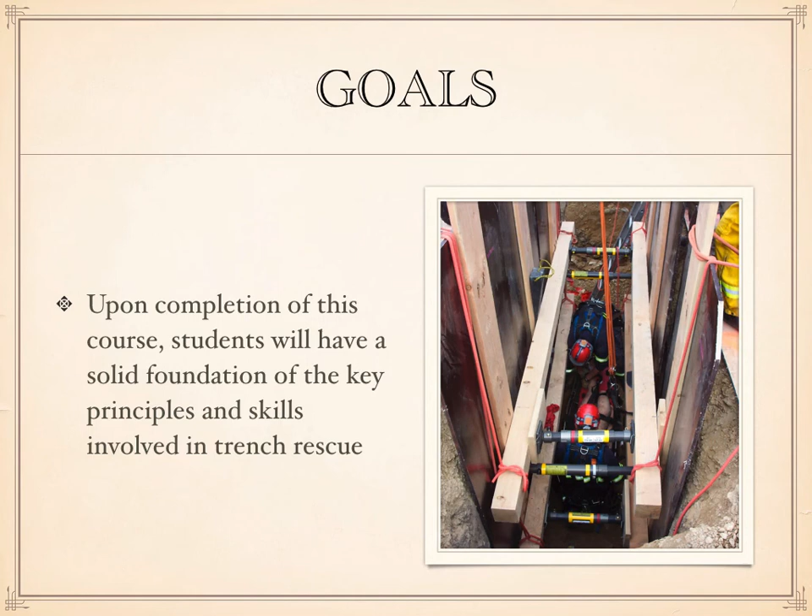Trench rescue is incredibly dynamic. The fundamentals are present on every trench collapse, yet each situation challenges you with different elements: large or small trenches, utilities involved, collapses occurring in different ways, different levels of injury, and soil principles that differ from place to place. Trench rescue is great in that way - the fundamental principles are the same for every trench, yet every trench is completely different.

Because normally when we complete the slideshow, we go out and do these skills, it's always prudent to mention safety. Anytime you're doing live trench training, it's very dangerous. There's always potential there - if it's a live trench, just because you're doing training doesn't eliminate that danger. It's very present. As instructors, we try to view the trench, look for danger signs, and make sure it appears as stable as possible before we feel confident training in it.

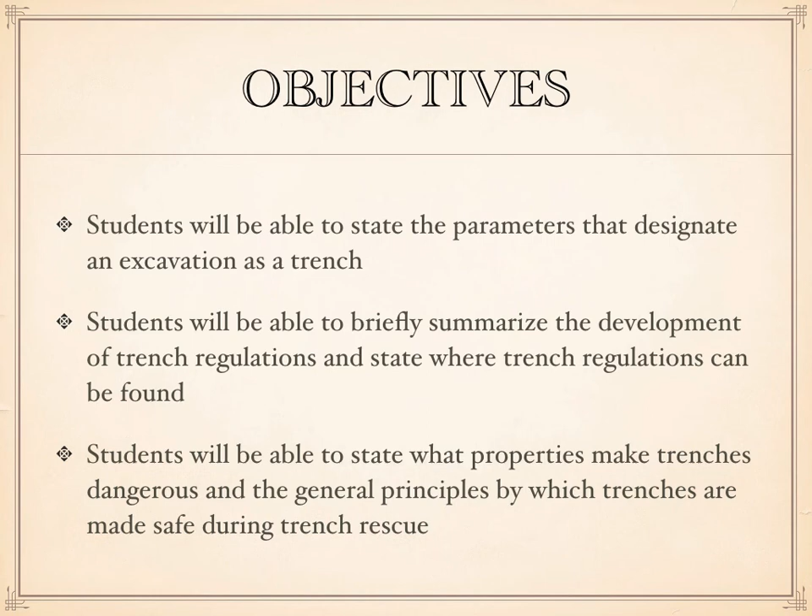Let's look at a few definitions. An excavation is any man-made cut, cavity, trench, or depression in the earthen surface formed by removing earth. A trench is always an excavation, however an excavation is not always a trench. So what is a trench then? A trench is any excavation in the ground that is deeper than it is wide, no wider than 15 feet at its bottom. When wider than 15 feet, we kind of go back to it just being a large-scale excavation.

Now, when we talk about trenches being deeper than they are wide, they need to be at least 5 feet deep to require that some form of trench protection be used. However, a 3 foot by 1 foot trench is still a trench - it just doesn't require trench protection.

So when we talk about trench regulation, when is protection required, really what we're talking about is OSHA. It's largely a construction industry mandate. Of course, if you go back far enough in history, you get to a point where OSHA wasn't around, and continue further back, you get to a point where we didn't have trenches.

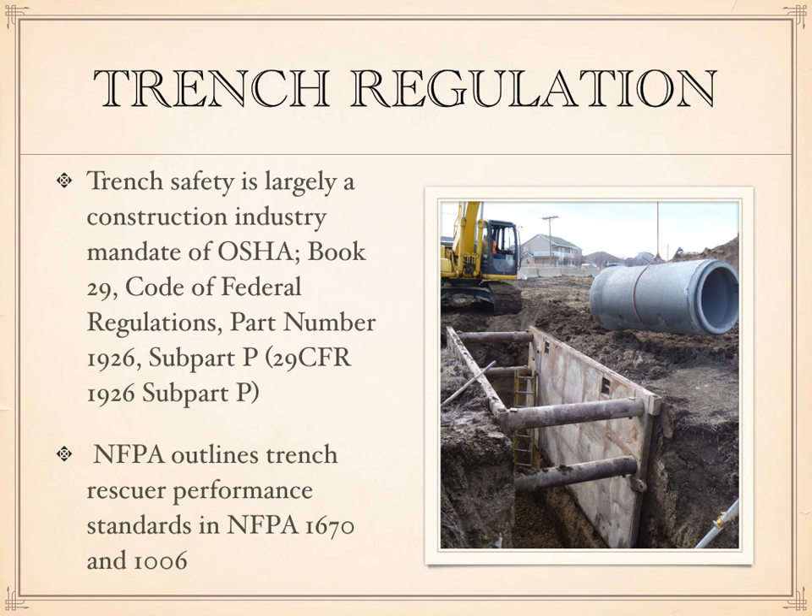Alright, so let's talk some basic soil principles. Uncut soil is very passive. Soil itself has a natural kinematic energy to it. When it's uncut and just there, not a lot of potential for movement. There is some, but not a lot. In this state, to relate it to paramedic type phrasing, you could say this soil has homeostasis. It's very passive, it's not going anywhere.

Of course, as soon as we excavate, as soon as we create a trench, we've taken that very passive, low-grade kinematic energy and made it very active. We've given it a high potential for energy. Gravity is acting on it, the environment is acting on it. There's vibration in the soil, hydrostatic pressures via rain or other things, environmental factors like wind. And given over time, the longer it's open, the freestanding time of the trench, the cohesiveness of the soil breaks down, and eventually it will collapse.

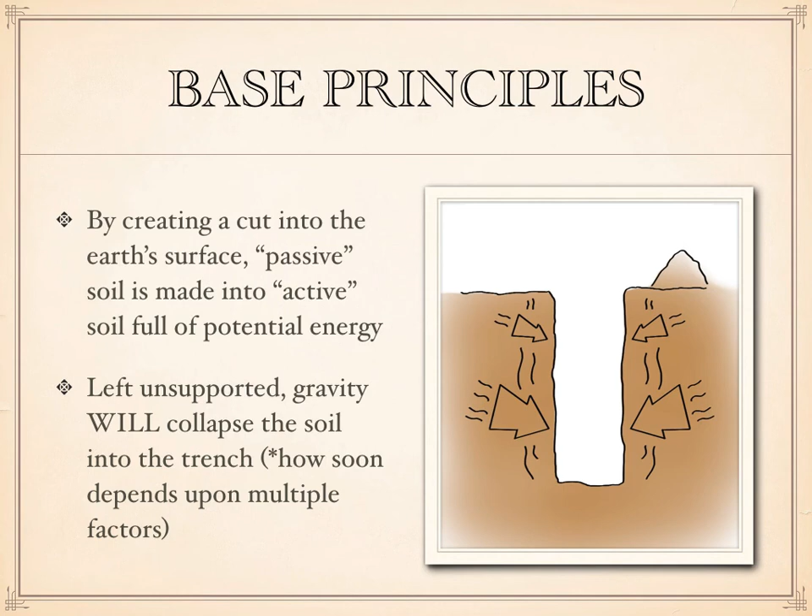Now, the danger of trench and excavation activity essentially comes from soil's weight in combination with its propensity to move. So when you think of the typical capacity of most backhoe loader front buckets being 1 cubic yard, if you've done any amount of landscaping work, you'll know that 1 cubic yard, a front bucket, is not a lot of soil. However, it is a lot of weight.

The accepted general weight of soil, just like a rule of thumb, would be 100 pounds per cubic foot. That simplifies the calculation and makes it nice and easy. However, it's a low estimate. According to the OSHA Technical Manual, soil's weight, depending on water content and rock content, is actually going to be closer to between 110 and 140 pounds per cubic foot.

So when you think of it that way, suddenly now you have a front bucket that weighs the weight of a mid-sized automobile, somewhere between 2,700 and 3,500 pounds. Consider that now coming in on top of you, if you were the one in the trench. Yeah, it's a very dangerous situation.

The OSHA Technical Manual states that 1 cubic meter, 35.3 cubic feet, is going to weigh possibly, again depending on rock content and water content, more than 3,500 pounds.

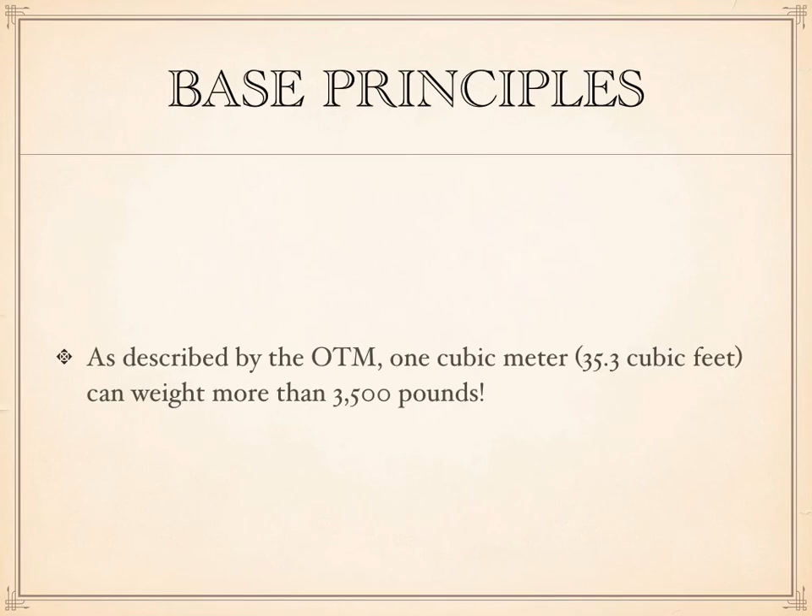A single trench collapse can very easily involve 3 to 6 cubic yards of soil. So we really are dealing with a very large amount of weight, a very large amount of potential energy here that creates that danger and hazard.

That's the reason why, if you show up on a trench, whether it's collapsed or not, if the trench is unprotected and somebody's down in there, maybe they're just unconscious, they've had a medical problem, a heart attack down there, if the trench is unprotected, you do not want to enter that trench.

Looking and considering those soil weights, you will not survive if you are fully buried. Unless perhaps you get lucky. There are circumstances that create situations where even fully buried persons or victims survive. There was a pipe between them and most of the collapse, or they were able to duck into a pipe, or the collapse happened in such a manner that they had a pocket where they were. So complete burial isn't necessarily the full end-all be-all, but you are dealing with a large amount of weight.

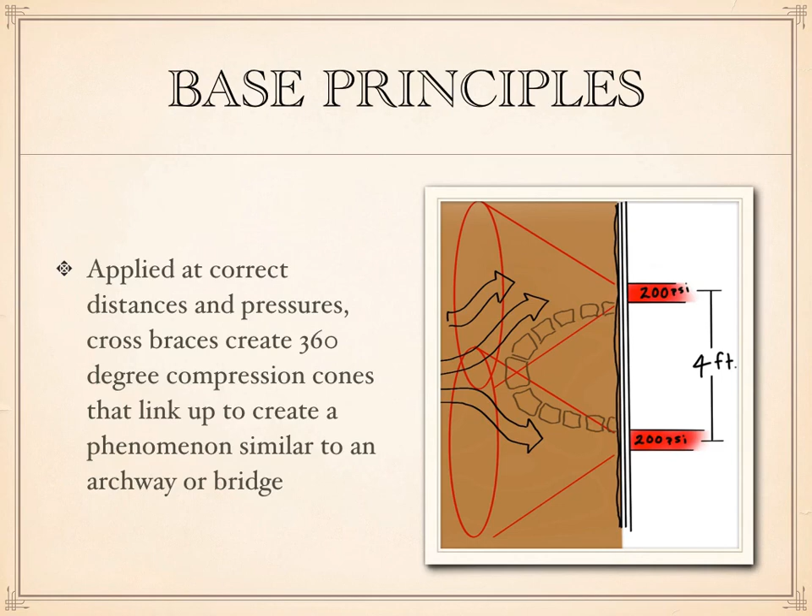Now, this arcing soil principle occurs both on a vertical plane as well as on the horizontal plane. So in some circumstances, like when we go and do trench rescue, we'll apply that rule of fours on a vertical and horizontal plane.

Now, in some instances you'll see in the construction industry, they'll use something like spaced shoring. They can do this in part due to the arcing soil principle. That arcing soil principle allows, with say a type A or type B soil, in some instances to not need the sheeting. You see in the diagram there, and we'll talk a little bit more about it later, but that's an example of open spaced shoring.

When we do this as a form of trench rescue, of course, we apply it as closed shoring. We'll create this arcing principle both vertically and horizontally, and we'll do it to create an area that's at least 12 feet wide when conditions allow.

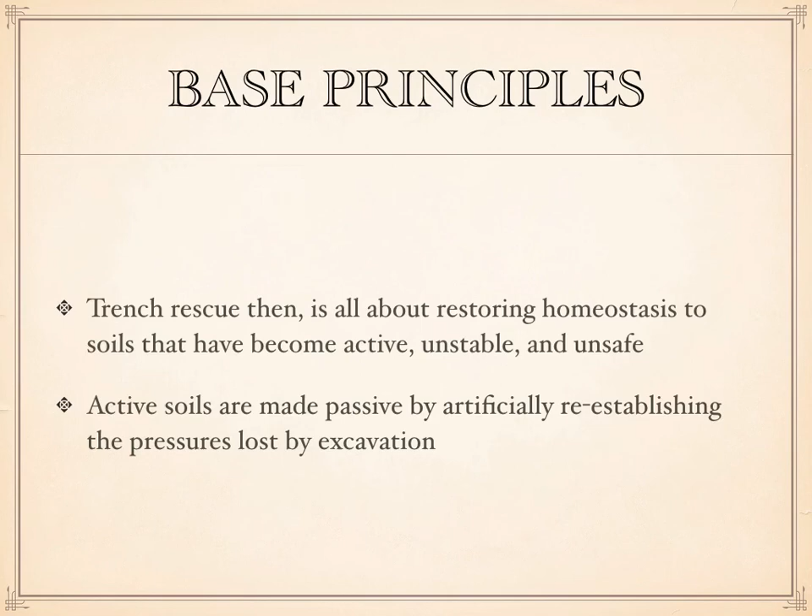Okay, so that's really the end of this module. Not too painful, short and simple, pretty basic, fundamental understanding, right? At this point, you should be able to state the parameters that define an excavation as a trench.

You should be able to answer what is the primary document where regulations on trench safety can be found, and at what depth are trench protective measures required.

Of course, you can read that final question there. Think about those soil weights, see if you can answer those questions. If you can't answer any of these questions, please go back and review. Then finally, can you generally state the principles by which rescuers render open trenches safe?

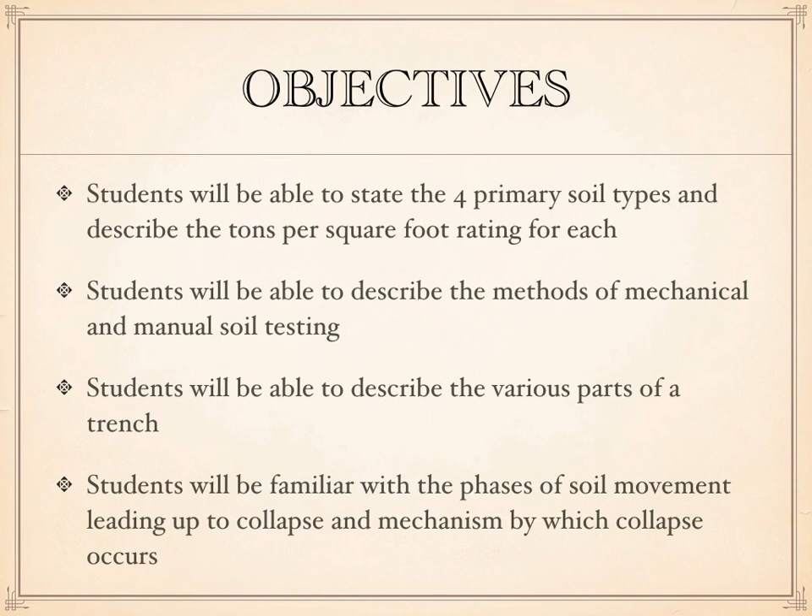Also, you'll be able to name and describe the types of collapse, describe the different protective methods used in the construction industry to make trenches safe, as well as be able to specifically state the component parts of a shoring system.

Alright, working right out of the OSHA Technical Manual here, you'll hear me refer to that as the OTM. The unconfirmed compressive strength of soil is the load per unit area at which soil will fail in compression. And that's kind of what they base their soil types on.

So we have soil - okay, so we have solid rock, which is pretty simple, pretty basic. For solid rock, they don't actually give it a tons per square footage rating for the unconfirmed compressive strength. So they don't give solid rock an unconfirmed compressive strength. For the remainder of the soil types, they do.

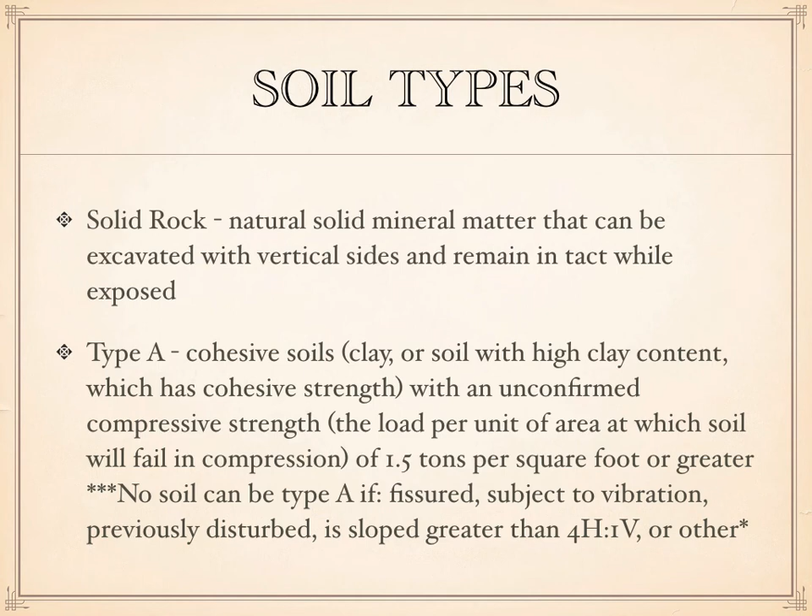Now, a type B soil is a cohesive soil also, but it has an unconfirmed compressive strength, or a UCS, of 0.5 tons per square foot up to 1.5 tons per square foot. So between that range, 0.5 to 1.5 for a type B soil. Type A, 1.5 or greater. Type B, 0.5 up to 1.5.

With the type C soil, you're going to have 0.5 or less. Now, any soil where it's submerged, if there's water freely leaking from the walls, or even submerged unstable rock, will automatically receive this classification. There is an additional soil type, a C60, but that's a topic for another slideshow, for anyone who's really excited about soil types.

Okay, so how do we get our soil rating when we arrive on scene? Well, we're likely not going to be classifying things in tons per square footage failure rating. However, there are manual soil tests that you can do.

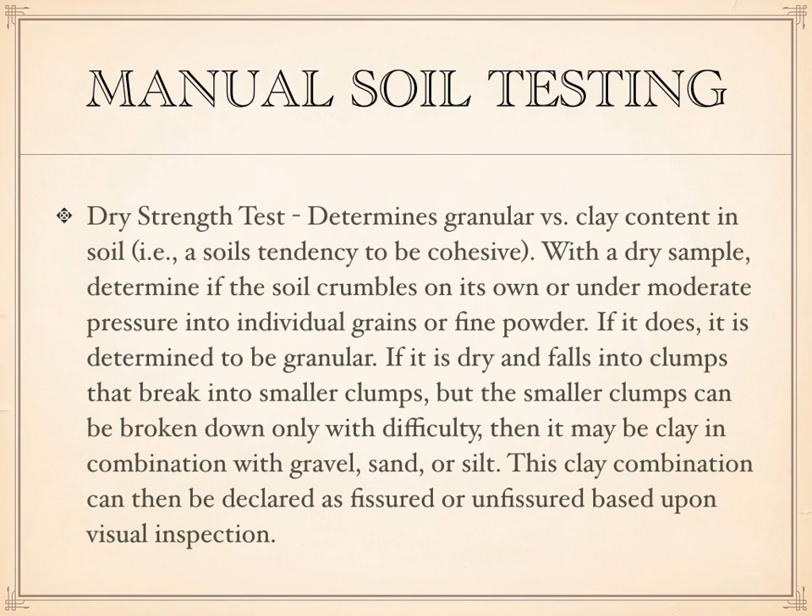There is another form of manual test called the ribbon test. It's done to determine how much clay or silt a soil contains. You're essentially going to take a saturated soil, begin to roll a 3/4 inch thick, 6-inch long cylinder, and lay it across your palm. Then you begin to squeeze and push some of that soil out over your thumb and forefinger until it's approximately 1/8 inch thick.

Now, as this is done, you allow it to hang over the side of the hand, and this piece that you're pushing over your hand is called a ribbon. The more of these ribbons you can get over the edge of your hand before it breaks and falls away, the more this tells us how much clay may be involved in the soil. If a cylinder forms 6 or more inches in length, then it is said to be clay. If it forms shorter broken ribbons, the soil contains silt, and a clay loam will barely form a ribbon of any length.

If you want to read the definitions of clay loam and all that good stuff, there's plenty of it available. Look in your OSHA technical manual and it'll give you all those definitions.

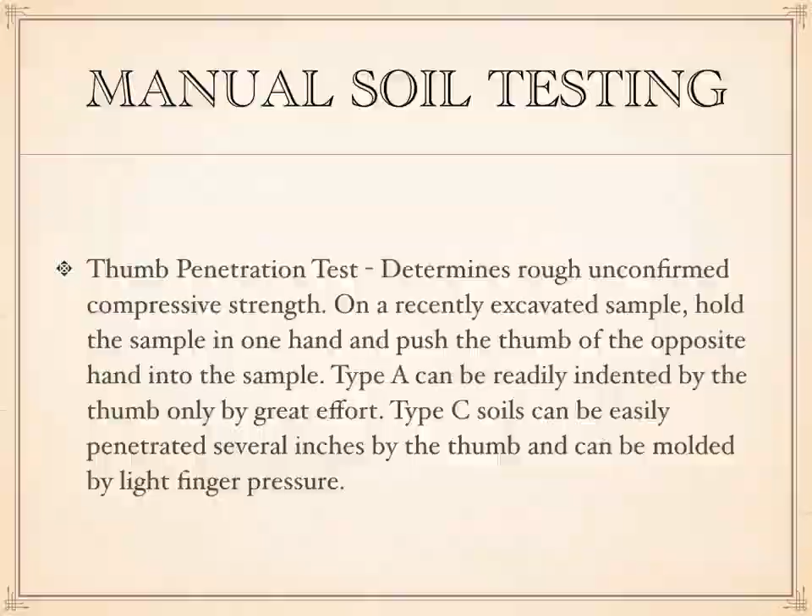I'll leave the comments for you guys. With the exception of some of those very first pictures you saw in the slideshow, all the pictures here in the slideshow were taken by myself, and the illustrations as well, as basic and simple as they are.

Now you can do mechanical soil testing. With a mechanical soil test, you'll actually get a nice reading that you can clearly say this soil is type such and such, or the unconfined compressive strength is this. Of course, again, it's that rating from the soil where you pushed the testing device in, so it's subjective. You might measure it in one location and get a reading, then go to the opposite end of the trench and get a completely different reading, or use a different sample.

So you have a pocket penetrometer, a little spring-operated device that when you push it into the soil, it has a spring, pushes in, and it'll ultimately give you a little reading. It's a fairly inexpensive tool.

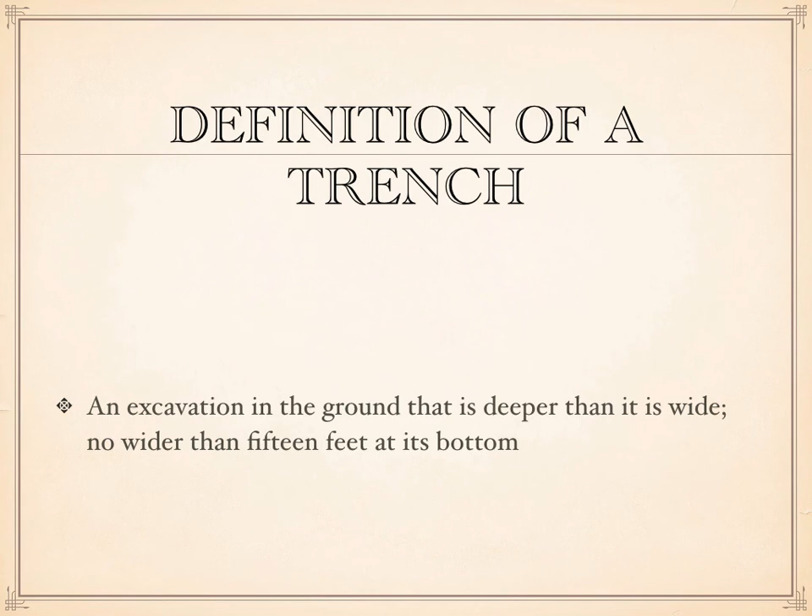Kind of a unique situation, just to be mindful of. If you have an excavation that's wider than 15 feet at its bottom, and yet there's some kind of form placed into the trench, whether it be a trench shielding system, or perhaps it was an excavation wider than 15 feet originally, but now they've built in a foundation and elements of construction. Anything put into that excavation that has decreased the width between it and the soil wall can still fit the description of a trench.

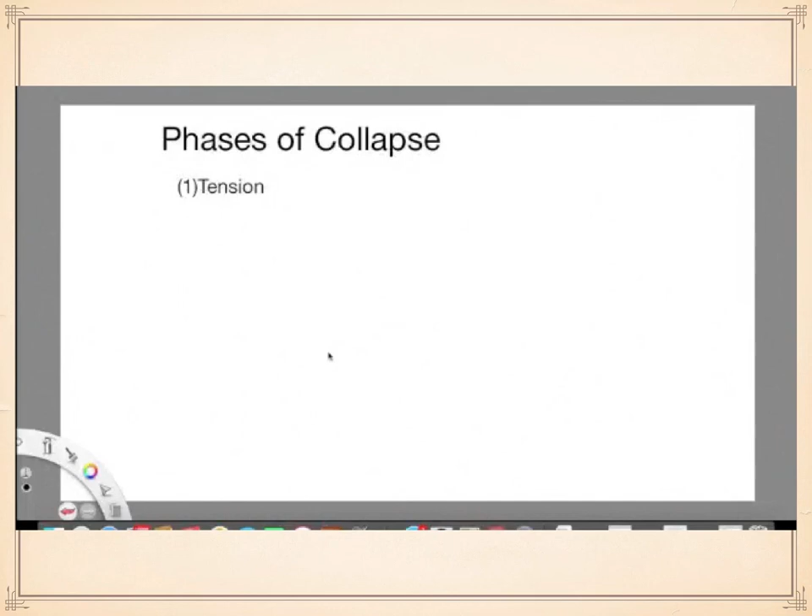Okay, this is your video on the phases of collapse, a little bit different than the actual forms of collapse. These are some of the things that happen leading up to a collapse occurring. So first, you're going to have tension. Anytime you open up soil, you create a change in that homeostasis, and it results in tension. Gravity's acting on the soil, trying to make changes. As the moisture level changes from drying out or rain, you're going to get tension that way, and you're going to weaken the cohesion.

Tension eventually results in cracks in the soil, either on the surface or below grade. According to the OSHA technical manual, tension cracks usually form at a horizontal distance of 0.5 to 0.75 times the depth of the trench, measured from the top of the vertical face of the trench. So here you're just watching me illustrate the effect of the tension cracking. The next phase, so that's tension, that's the first phase - the next phase is movement.

With movement, deformations in soil from increasingly imbalanced pressures start to actually change the soil physically to the point where it becomes visible. Now it's fairly minimal, most likely not going to be observed by your average construction person. Here, as I'm illustrating, I've made it a little bit easier to identify, obviously.

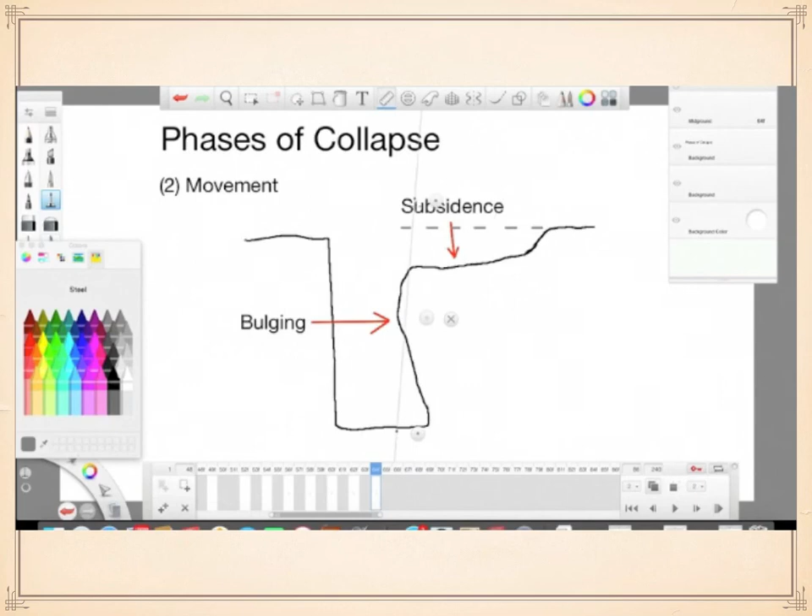One of the things that's going to happen is the soil surface is going to change level. That's called subsidence. This is when the soil fairly close to the trench opening will actually sink. Now that can occur with or without bulging. It can just compress and sink where you really don't have a bulge, but a lot of times you're also going to get bulging. Bulging is another form of movement that indicates collapse. It's one of those things you want to look for if you're teaching a trench class or working around a trench. You want to observe the trench walls for subsidence and bulging.

If there hasn't been a collapse, those are signs that a collapse is impending. There is another form of movement, and that movement is called bottom heaving.

In bottom heaving, pushing up of the soil at the trench floor results from all that significant pressure pushing down. The trench floor is weakened more so than the trench walls in this case, by moisture or by some other means. It might just be inherently weak at that level of depth, and it pushes up. Some experts classify this condition as a form of collapse known as compression collapse.

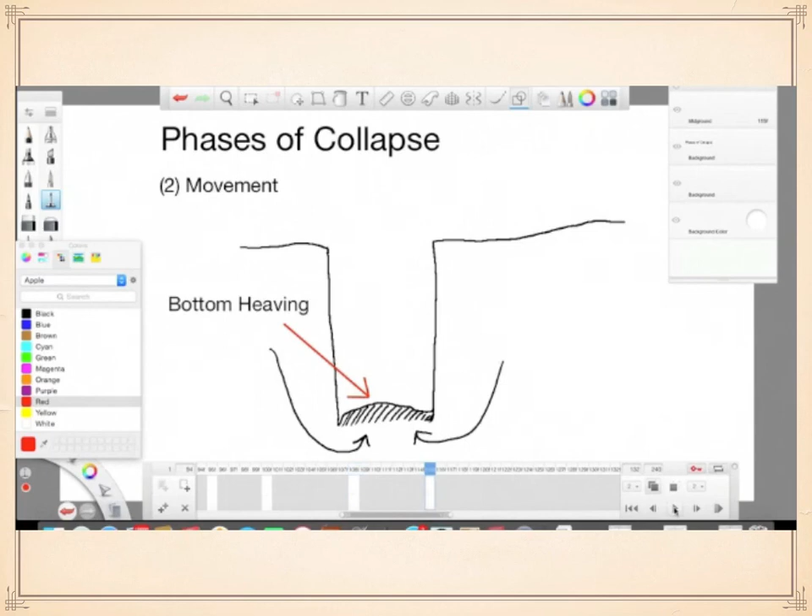Another form of movement is boiling. Here we're still watching the bottom heaving. Figured the illustration would be a little bit better than just a dry slideshow. So another form of movement is boiling.

Boiling happens when the trench has been cut, for the most part, into a water table, and maybe there wasn't water in there initially, but over time the water seeps in, begins to push up the trench floor, as well as create a saturated condition down there. Of course, when that happens, you're weakening the support of the trench walls, and it's an impending warning sign of collapse.

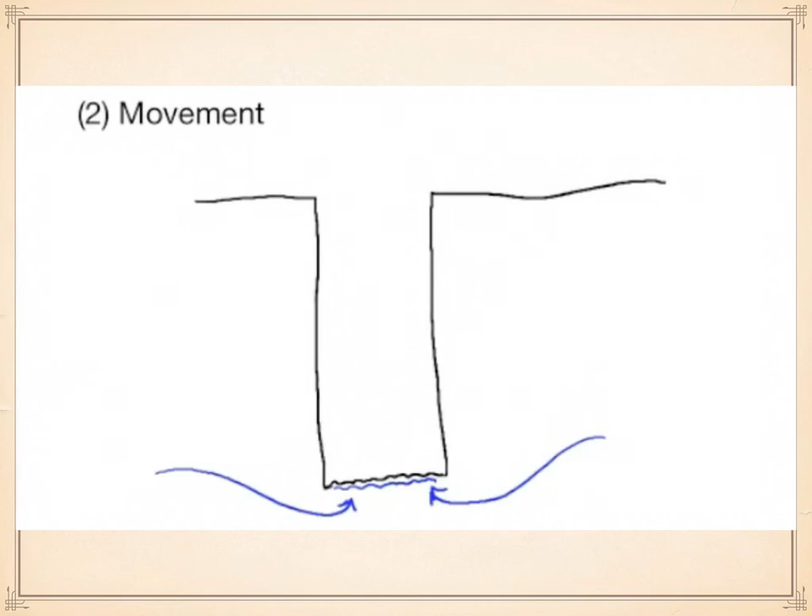Now the third phase leading up to collapse is actually collapse. So this is more the means of collapse than a phase leading up to it. But you basically have two means by which collapse is going to occur. Either the collapse will occur gradually or it's going to occur catastrophically. It's either going to occur because of toppling. Toppling occurs when the trench's vertical face shears along the tension crack line and topples into the excavation.

More accurately, toppling is a forward rotation out of the slope of a mass of soil and rock, also about a point of axis. So here I've put the red dot into my illustration here, kind of showing how the collapse - it could be that point could be anywhere in the trench wall. It could be at the very base where the floor meets the toe.

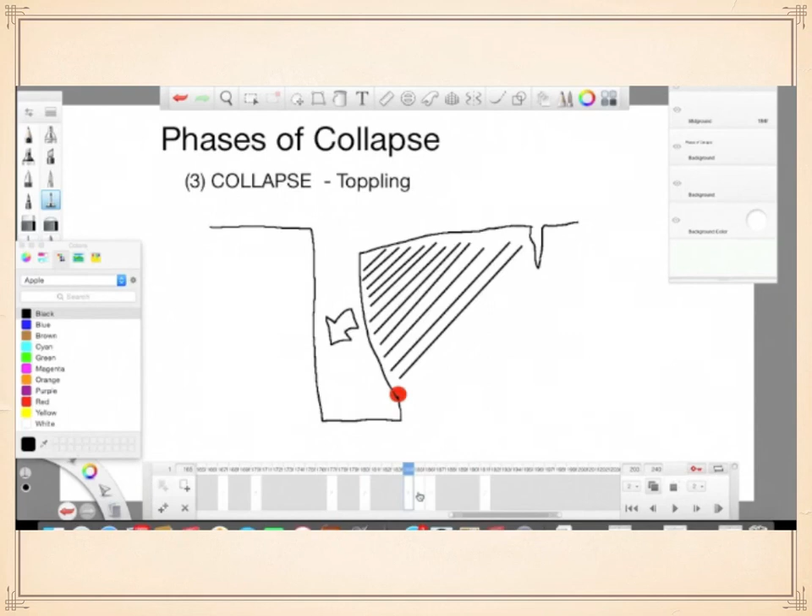Typically, the belly of the trench is the weaker area of the trench. So here I threw that dot there just to kind of show you. The toe is staying strong, but it's pivoting from that weak point in the wall, and it all kind of moves on that. It kind of acts as a point of axis for the collapse. You can see how gravity just takes it.

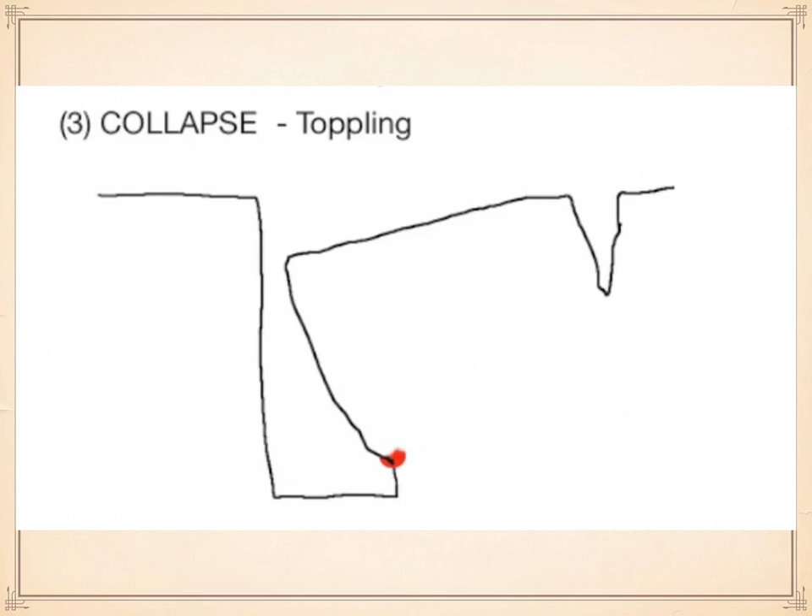Another form is called sliding or sloughing. That's commonly used here. It can be a little bit confusing because there is a type of collapse with the same name. However, as a means of collapse, this is just where it's a downsloping movement of the soil. The cohesion is weakened, different from a pivot point or an axis point where it kind of topples in.

You can kind of think of this as like when you have a spoil pile, the soil will try to attain that nice desired angular slope, that angle of repose. Here the soil, as cohesion breaks down, the soil is sliding down into the trench. Again, it can be catastrophic, or it can occur gradually.

Factors that contribute to soil collapse include soil activity, vibration, hydrostatic pressure, environmental factors, and the amount of freestanding time. All those things are going to play a part. Soil activity includes the soil's kinematic propensity for movement - it wants to go, gravity's working on it. Time is all it needs. Eventually, at some point, any open trench is going to collapse if left continually subject to environmental factors, gravity, hydrostatic pressures.

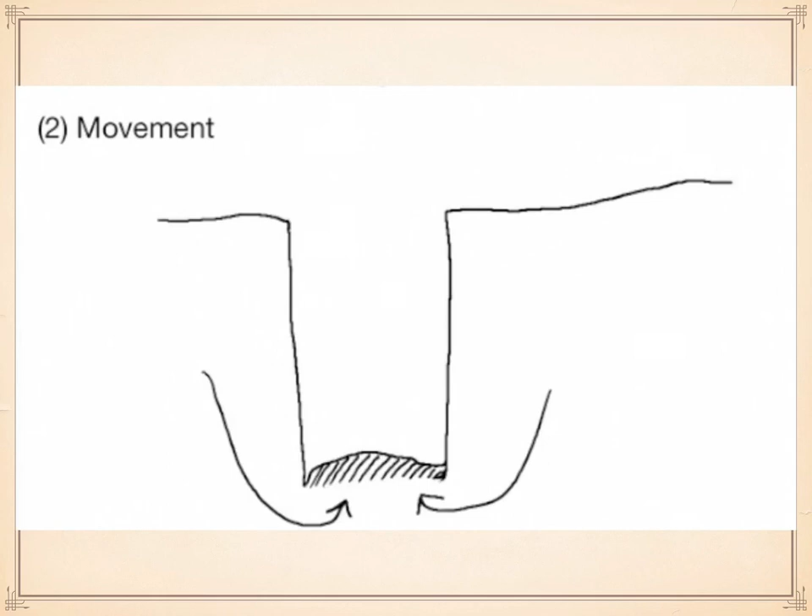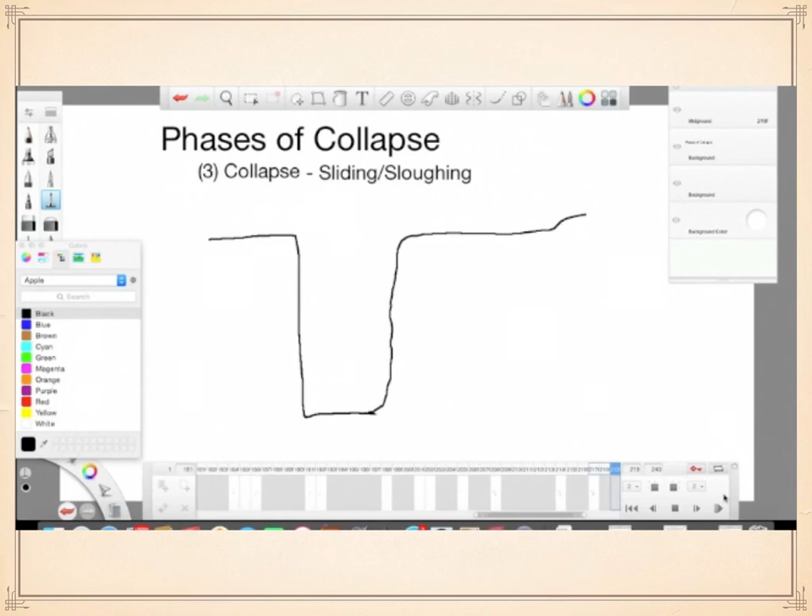You have your tension cracking, your first forms of movement, subsidence and bulging, that bottom heaving, boiling, of course your toppling, pivoting on that axis, and then again you have your sliding and sloughing.

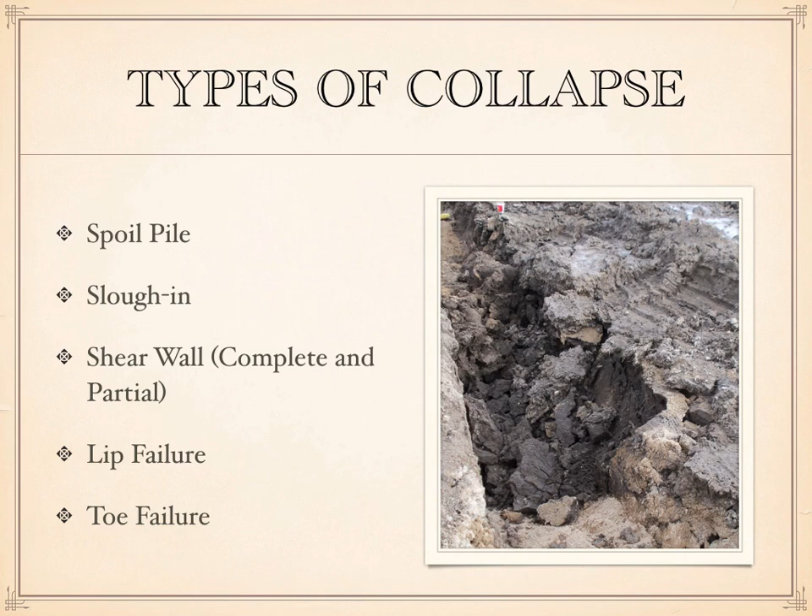OSHA requires a 2-foot setback for spoil piles. Spoil piles are an encumbrance. They add soil weight, they contribute to that surcharge loading. And just by virtue of being next to the trench, they can be enough to contribute and cause a collapse to occur.

At the same time, they're sitting there. They have a natural angle at which the soil wants to settle, that maximum allowable slope or angle of repose, and perhaps some vibration occurs, or just gravity gets it over time. The spoil pile itself can slough off and fall into the trench. So there are two ways spoil pile collapse can occur: either by contributing to a collapse through surcharge loading, or the spoil pile itself falling into the trench. That's what we're looking at here.

It's a 2-foot setback that OSHA requires. Most companies will strive for a 4-foot setback. Doesn't always occur.

Whoever's excavating, if they're in a hurry, it's quicker to, as soon as you pull that bucket out, drop that soil right there, and it tends to slide back in. Soil tends to want to assume its angle of repose immediately, so it tends to settle in. By virtue of that, whoever's excavating may realize they need to move that spoil pile away because it's falling back in. But there are occasions where you'll find spoil piles too close.

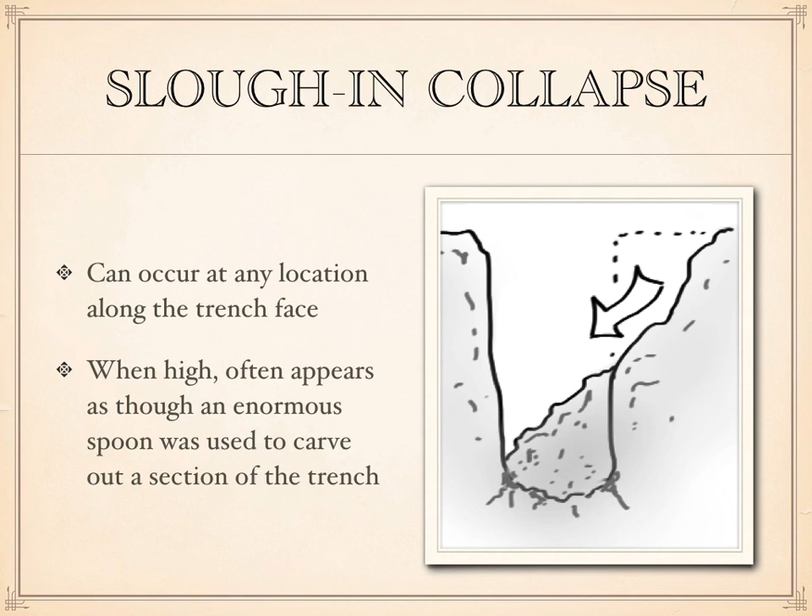So it can occur like you see in the picture here, where it occurred up high, and you've lost that entire portion of the belly and the lip. A slough-in can also occur, and this is a particular note to rescuers, in a manner where the belly gives way, it sloughs into the trench, and it leaves an overhang. Usually occurs where the soil was affected by hydrostatic pressure. There's been a lot of rain, the top sides absorb the water, it's soaked down and weakened the belly.

When you're approaching a trench, we'll get into it a little bit later, but this form of collapse, where it sloughs in and leaves an overhang, this is where a rescuer can, if he approaches the center of the trench as opposed to approaching from the ends, find himself in a sticky spot. Now, the slough-in from mid-belly leaving an overhang isn't a type in and of itself, it's just a slough-in collapse. This just occurs in a way that it's worth mentioning on its own, due to the danger to rescuers.

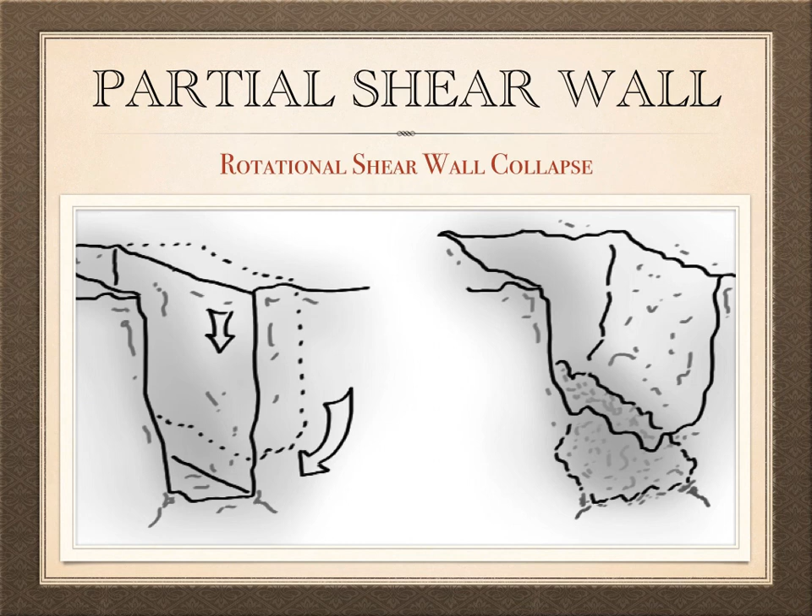Now, there's also partial shear wall collapses. This is commonly referred to as a rotational shear wall collapse, probably the most common form of collapse. You still have that vertical plane effect, but at some point it held strong, like in this picture where you see the toe held strong there. Otherwise, the collapse occurs on a very vertical plane through that sliding mechanism, so it releases and then collapses into the trench.

Another form of partial shear wall collapse would be the wedge or triangle collapse. Obviously, when we have corners in a trench, whether it's T or L shaped, those are inherently weak areas. You have open trench faces that come together and meet, they both lack support, and gravity is doing its thing.

There's also lip and toe failure. Less common forms.

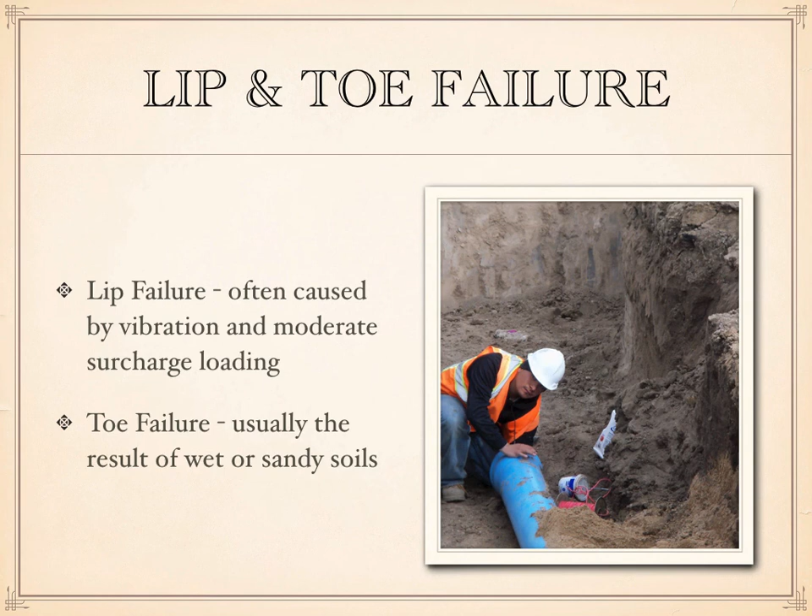Again, there's a slideshow on it that I made and illustrated and put just on the YouTube channel by itself, so you can watch that again if you're so inclined. You can't really go out and film these types of collapses occurring, and this is just a great way to review as you're needing to do so over time, and you kind of start to forget these type of things. Good to go back and review.

All right, Jason Hankins here with another trench video for you. Just informational, this is really basic kind of trench 101 type of stuff. Certainly informational - what you name the type of collapse once you've arrived on scene doesn't really matter, but these are some of the terms you might hear if you're talking to a heavy rescue guru about trench collapse type stuff.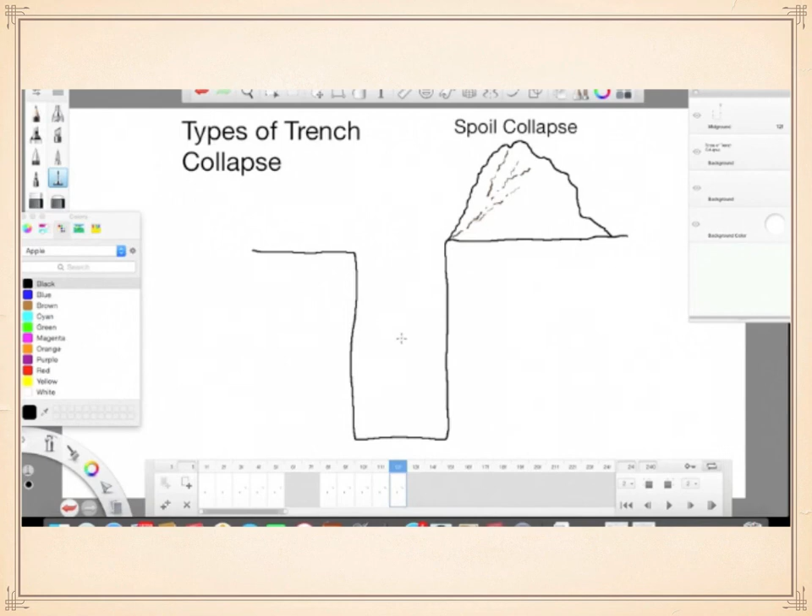One of the most basic types of collapse would be a spoil pile type collapse. Remember, OSHA requires a 2-foot offset, that doesn't always occur. Soil has a natural angle of repose, otherwise known as a maximum allowable slope, and that's the slope where gravity will naturally make that soil settle. If you pile soil at an angle steeper than that, or cut soil at an angle steeper than that, you're going to have a tendency for that soil to want to give in to gravity and fall into the trench.

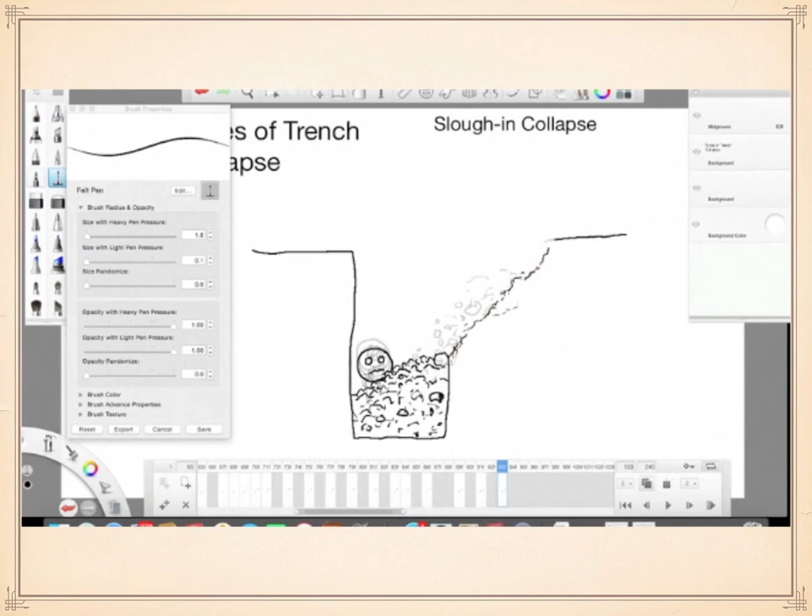Slough-in can often be due to surcharge loading - that's heavy items in the area of the trench or very near to the trench opening. Remember, we park our vehicles out of the hot zone, greater than 50 feet away.

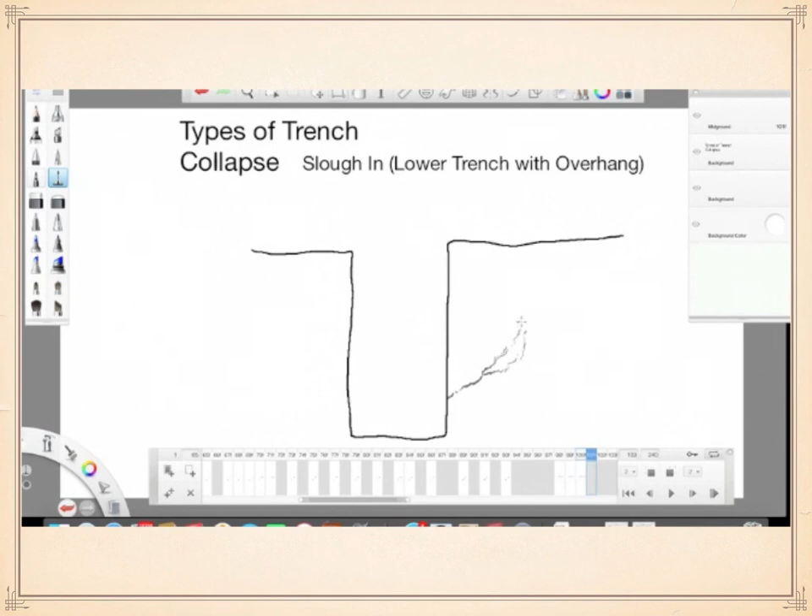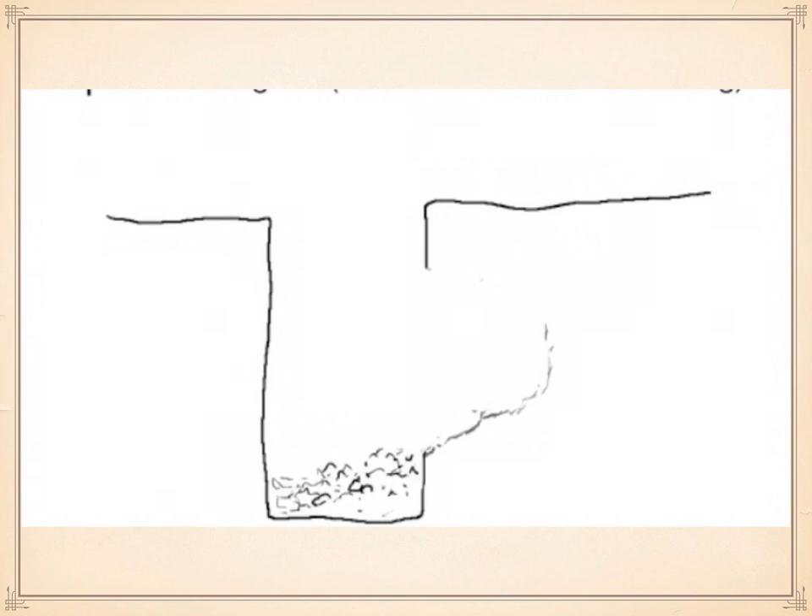Did a little graphic here of just a slough-in occurring in a mid-belly type of slough-in. It's not really a type per se on its own, it's still a slough-in collapse. However, this warrants particular attention because it leaves an overhang, particularly dangerous for rescuers, anybody coming into the area where this has occurred. Potential to stand right at an overhang. That's why when we're approaching a trench initially, we approach from the trench ends versus approaching from the side - we don't want to get caught by an overhang. Overhangs are less likely at the trench ends.

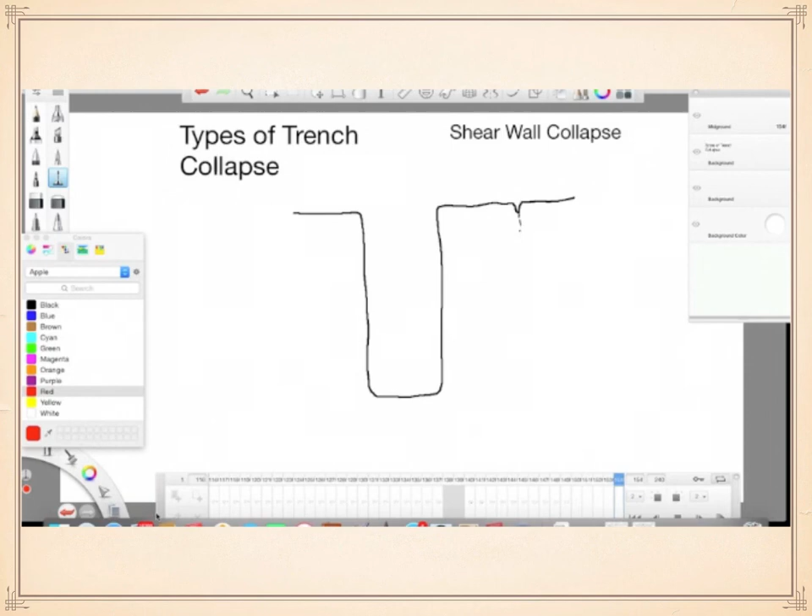So the next type of collapse that you're going to see is going to be a shear wall collapse, also known as a sidewall collapse. Very catastrophic, usually occurs fairly quickly, can occur slowly. Usually occurs on a nice vertical plane - all the shear wall collapses will occur on a very sheer wall plane. A lot of times in areas where there's been previous excavation.

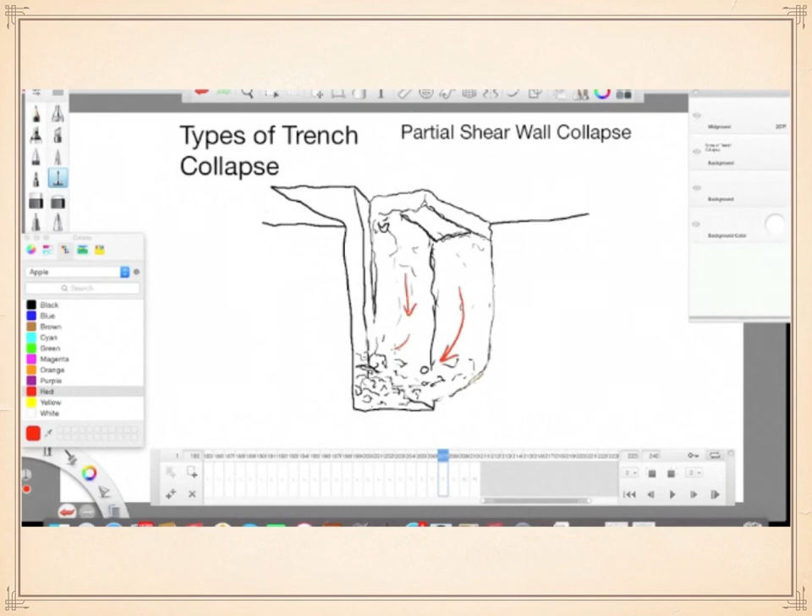Here you're seeing a form of partial shear wall collapse called a rotational collapse. The rotational collapse involves a kind of a slough in a very downward manner. So it gives way low, and then gravity takes it and pushes it down and on a curve into the trench. This is where you'll often end up with a victim slammed hard against the trench wall and pinned.

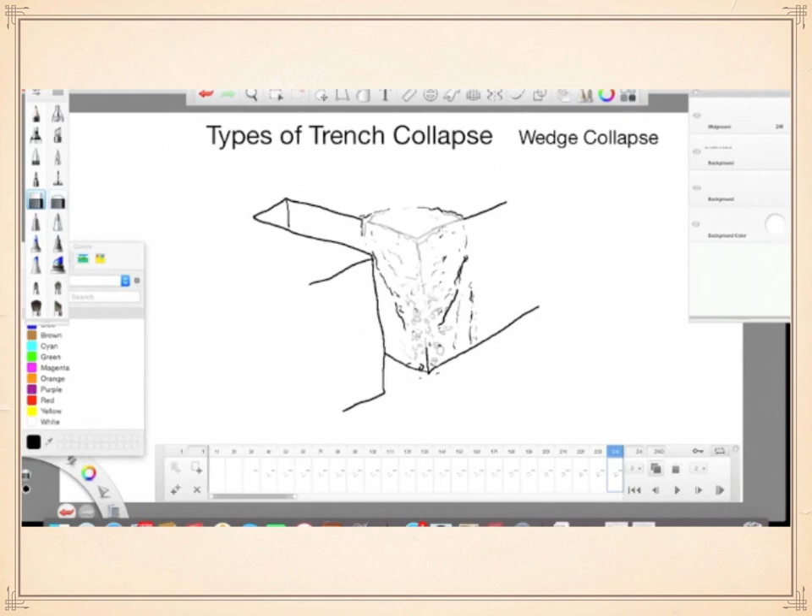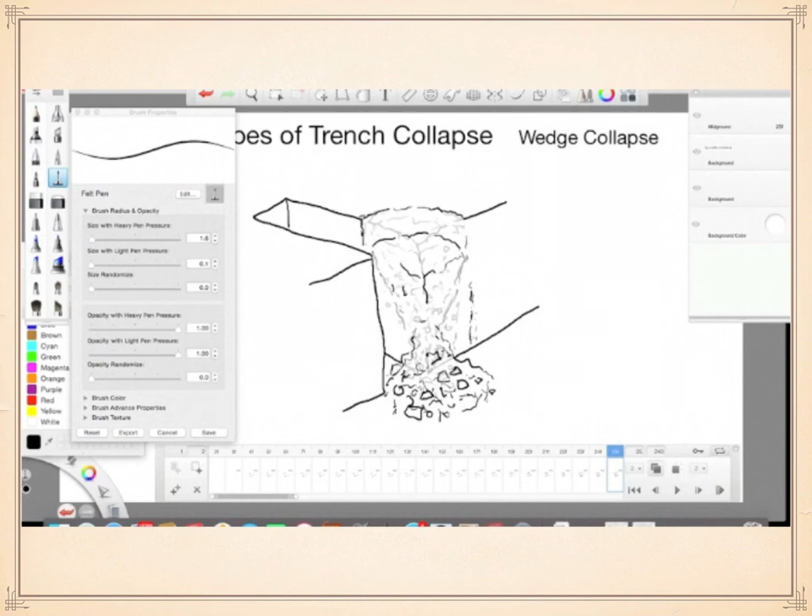T's and L's are very difficult to deal with, somewhat problematic for rescuers depending on the level of the wedge. It's a subset, more or less, of the partial shear wall collapse. Here I've shown it kind of partially up the wall, but it can occur, of course, full length from the toe to the lip.

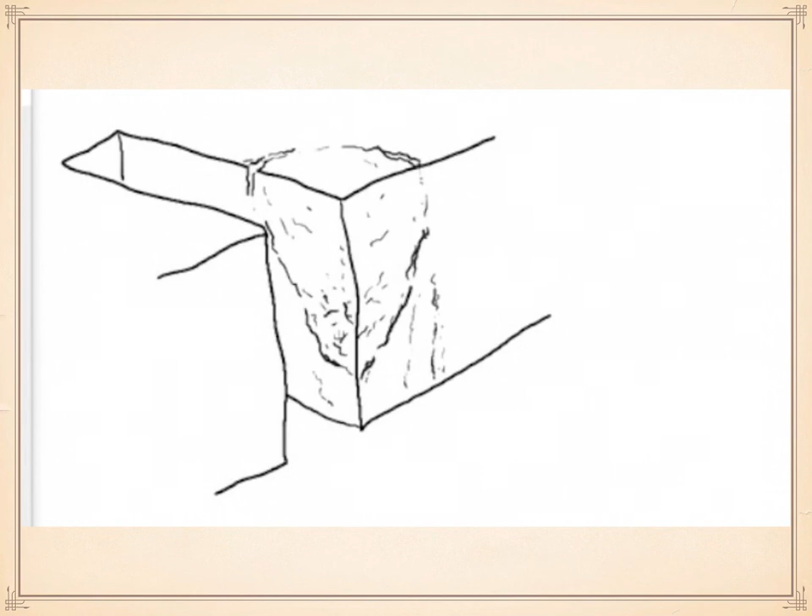The next two forms of collapse that you're going to see are a lip failure and a toe failure. A little bit less common. Lip failure usually occurs when you have a nice, very cohesive soil, nice and stable, but something in particular at the top—here I've drawn a little guy with a jackhammer—but whatever it is, whether it's surcharge loading, vibration, maybe it's weather, something causes just a weakening in the very upper portion of the trench, and you'll have a lip failure. Not usually too problematic unless someone was down inside the trench at the time the lip failure occurred.

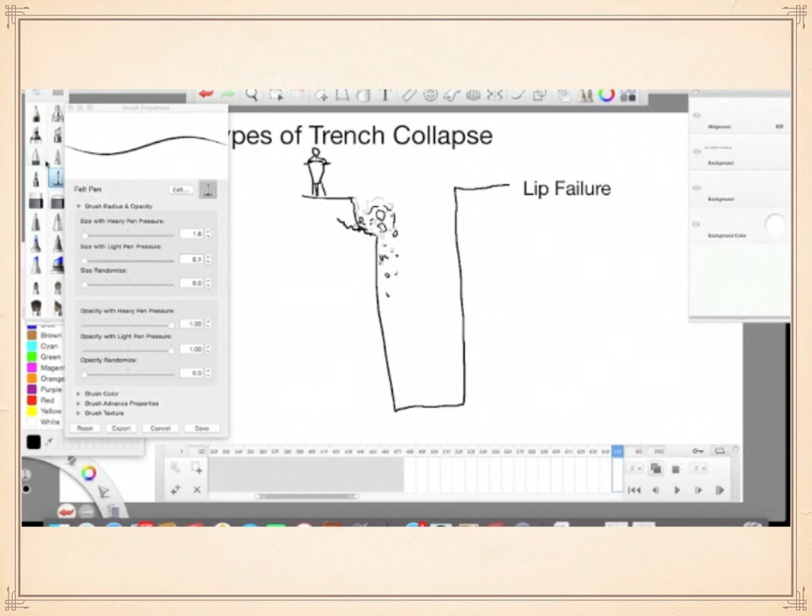The falling soil, falling objects from the top—if something's laying directly on that lip, it can fall down into the trench and injure someone quite severely.

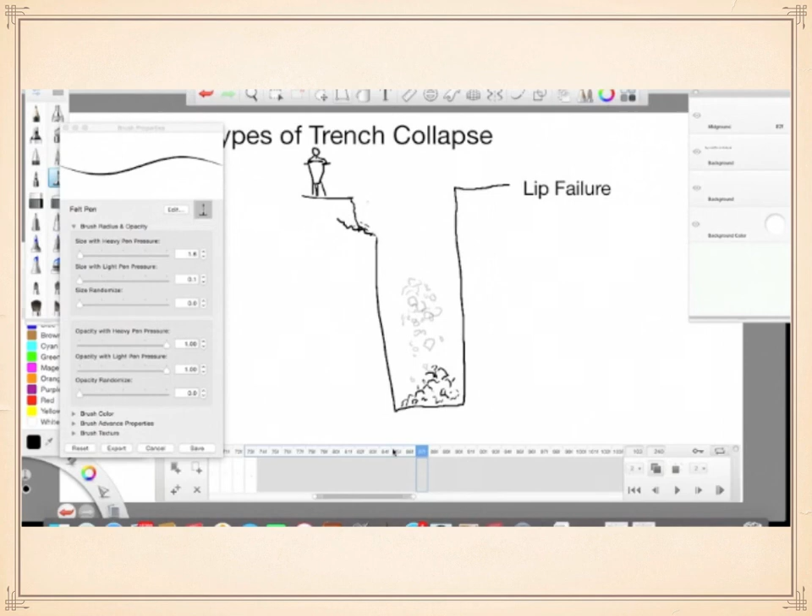All right, so the next form is toe failure—failure just at the toe. Again, that form of collapse is going to occur in very specific conditions. The soil is very cohesive, things are holding together well, but something in particular causes a weakening in the toe—perhaps a high water table, large amounts of rain, water used during a construction process, maybe combined with a little bit of vibration. But something is weakening the soil at the very base of the trench, where normally you have some support and some strength in the trench wall. In this case, weakening it to the point that the toe fails.

Of course, at that point you have to worry about the next form of collapse that's coming.

A condition that's kind of a toe failure, a subset of toe failure, worth mentioning is the bell-bottom pier condition. That's where the soil kind of sloughs in at the very bottom on both sides, or in the circumstance of like a pier hole being drilled into the soil—someone's going to pour big concrete piers, they create just a circular hole in the earth. Again, add in a high water table or significant rains, and if that bottom gives way in a circular manner, or in the case of the trench on both sides, then you have what's called a bell-bottom pier condition. Really leaves no safe place to stand or operate near the trench edge.

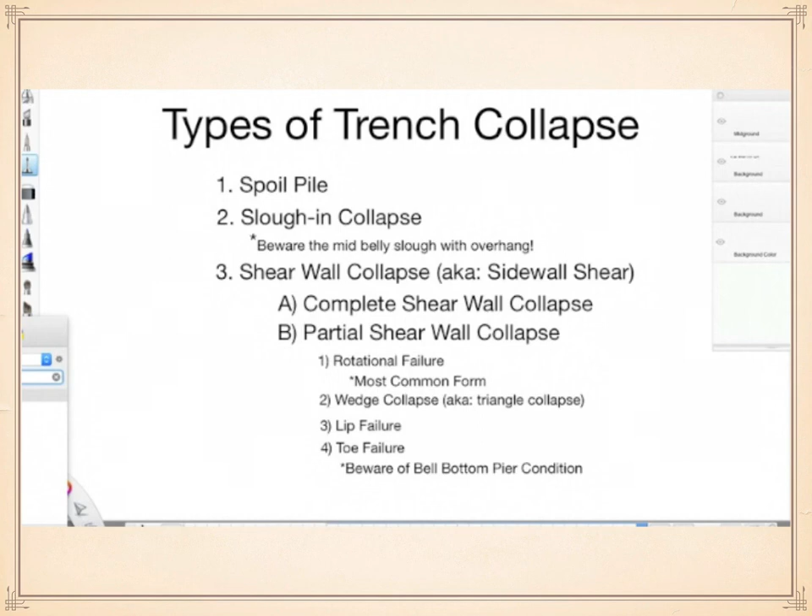All right, so just a little bit of review. Spoil pile collapse, slough in—beware of that mid-belly sloughing with the overhang. Shear wall collapse, also known as sidewall, with your complete and partials—rotational failure being the most common, wedge collapse, lip failure, toe failure. Just be aware of bell-bottom pier conditions. Don't see that a lot, but very dangerous.

Spoil pile. Final review here, kind of. Slough in with overhang. Complete shear wall collapse, partial shear wall collapses—subset rotational failure, most common form. Subset wedge collapse, common to T's and L's, of course. Lip failure. Toe failure. And of course, bell-bottom pier.

All right, one more time just to beat this thing to death.

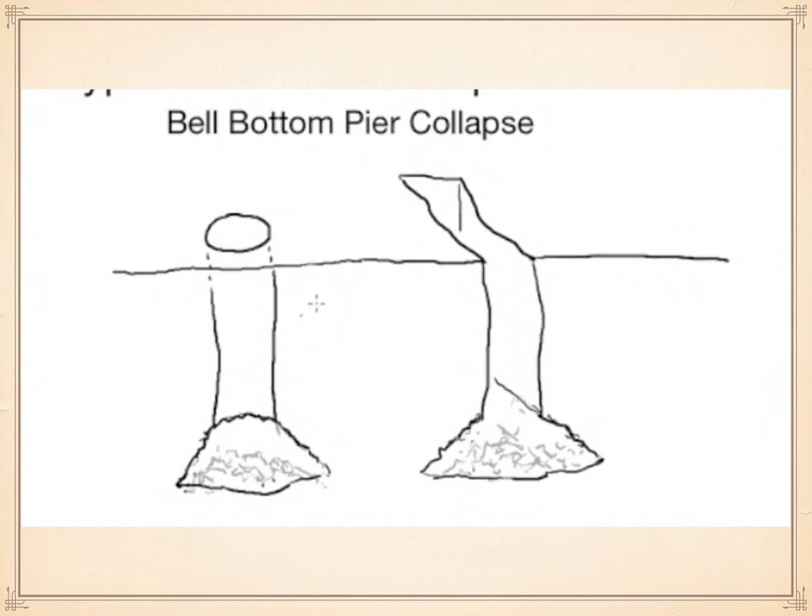All right, moving on to protective systems. Protective systems are something you could encounter. We're going to build our own protective system when we arrive on scene, but you'll also find them already on scene when you arrive to a trench collapse. Potentially not, that might be why you're there. As you drive around looking at construction, road construction and otherwise, you'll see the various protective systems in use.

So the first protective system worth mentioning is sloping. Of course, that's cutting into the soil at a nice angle so that you don't deal with that angle of repose, and you reduce the risk of collapse simply by cutting the soil itself at an angle where there's somewhat of a passive energy.

The angle of incline required to prevent the cave-in is going to vary with the soil conditions, the environmental conditions, and the level of encumbrances expected during that operation. So that's a construction industry type thing, of course.

Benching also is a construction industry method, where they're going to cut essentially what looks like steps into the side of the soil. And how many steps and how tall they can be is all determined by the soil type, the weights they expect in the area, the encumbrances, and surcharge loading.

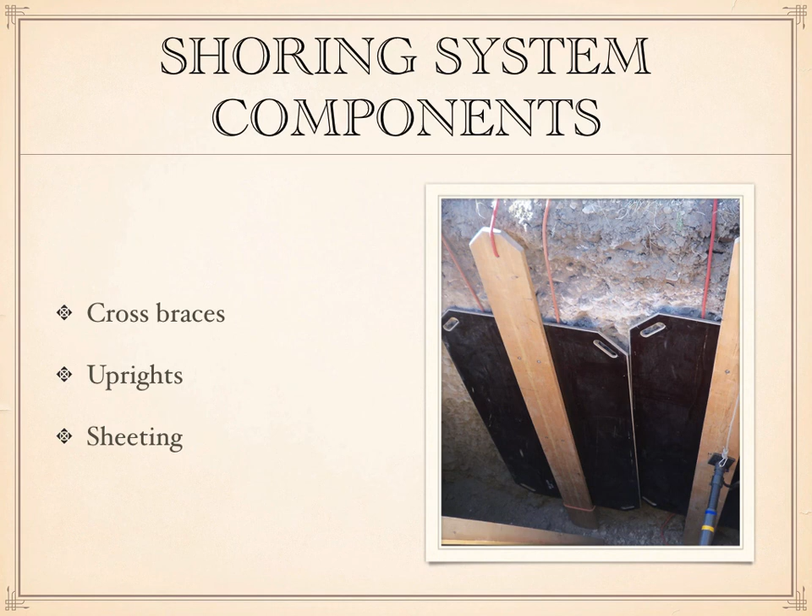Additionally, when you're talking about shoring systems, you'll hear in the construction industry of spaced shoring. Spaced shoring is an option that can be done in like a type A soil. It's very stable, but they do want to provide some stability to it. What you'll see when you see spaced shoring is you'll see a cross brace with an upright, and the upright itself is placed against the soil. And the next element to the shoring system will be several feet over, leaving some exposed trench wall. This can be done in stable soils like type A soils.

What we're going to be building when we're building shoring systems is closed shoring systems, where the sheeting of the system allows no gaps, no exposed soil wall. It's sheeting to sheeting to sheeting, all the way across.

There also is different types of shoring. You can have your aluminum hydraulic shoring, your pneumatic shoring, and your screw jack shoring. Of course, those are all terms referring mainly to the cross bracing.

With timber shoring, you're going to end up using tabulated data from OSHA to determine exactly how big of timbers do you need, 4x4 or 6x6, and what are the true expected weights of the soil at what level. So if you're going to be doing a lot of timber shoring, you need to plan on being very familiar with that document and being very, very good at performing a timber shoring operation.

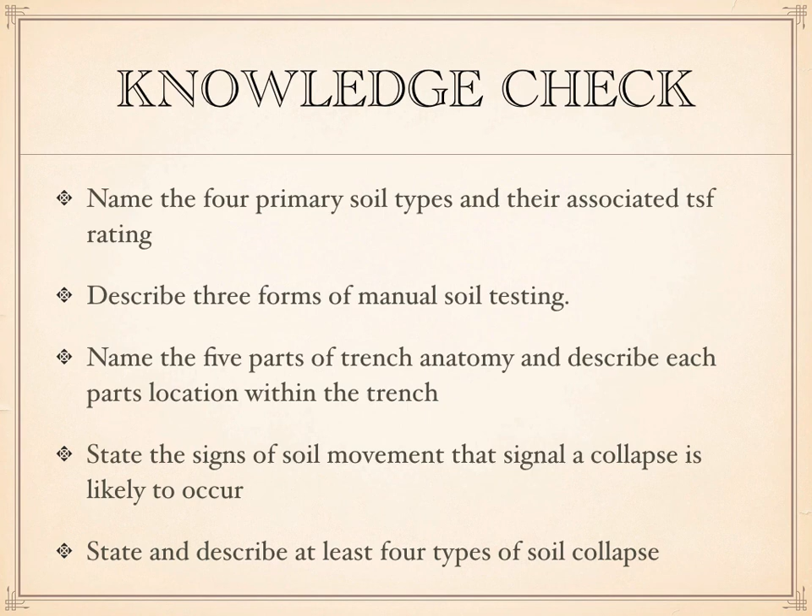A few more questions here. All right, see if you can answer those questions. Pause the video and we'll come back and we'll begin Module 3.

Okay, I assume you all had a break and feeling a bit refreshed, you've got your coffee refilled. Let's get into Module 3. I'll try to talk just a little bit more openly, a little bit more casually as we go through this. This really gets into just the trench emergency response, and we'll try to go through it semi-quickly. This is the point in the slideshow where really we kind of hit the fundamentals and then get you out to the soil and start practicing these techniques and really start to teach you more and give you more information. But this module will give you a basic understanding of what you're going out to do exactly when you go out to a trench.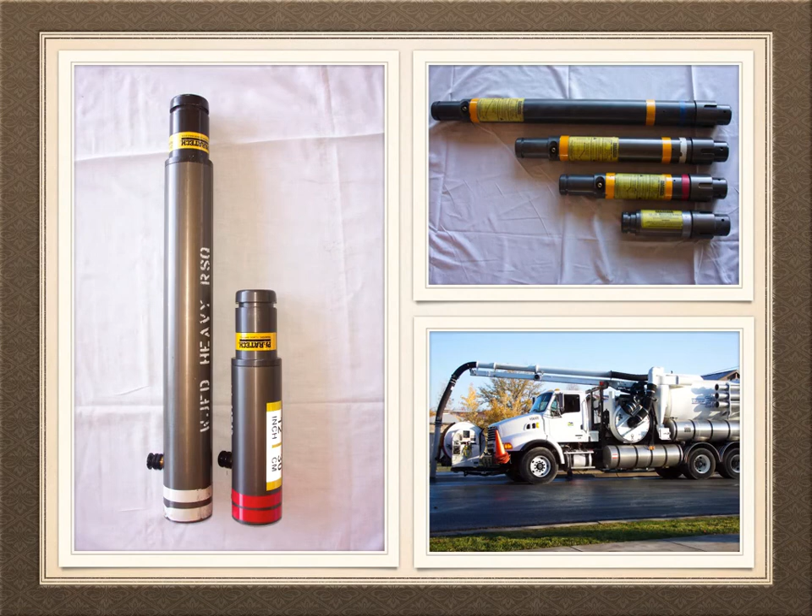In West Jordan, we use Paratech struts, so we've got them taped according to length: blue struts, white struts, red, and silver. Extensions get a double taping, so a double white or a double red. I believe our marking system is consistent with UFA's and most of the valley departments.

Through that picture in the bottom right of the vacuum truck—pre-incident preparation doesn't only include training with your own department, it should include training with other departments, including your local utilities department who may be running a vacuum truck. That's something you have to train on beforehand, before the incident occurs. If you wait till later or during the incident, you're going to have a hard time.

Here's another element of pre-incident preparation: trying to make anything done on scene of an actual collapse that much smoother, taking out the element of having to think things through as much as possible.

It sounds kind of funny, but in the context of struts, we've made a sheet that the strut team themselves can reference. The RO can call out a measurement—say I have a trench that measures 38 inches. RO calls out 38 to the strut team, and they can refer to this sheet and immediately, without doing any calculations, look down and see, okay, I can make 38 inches with a white strut and a red extension. It simplifies the thought process and makes it quicker and more efficient.

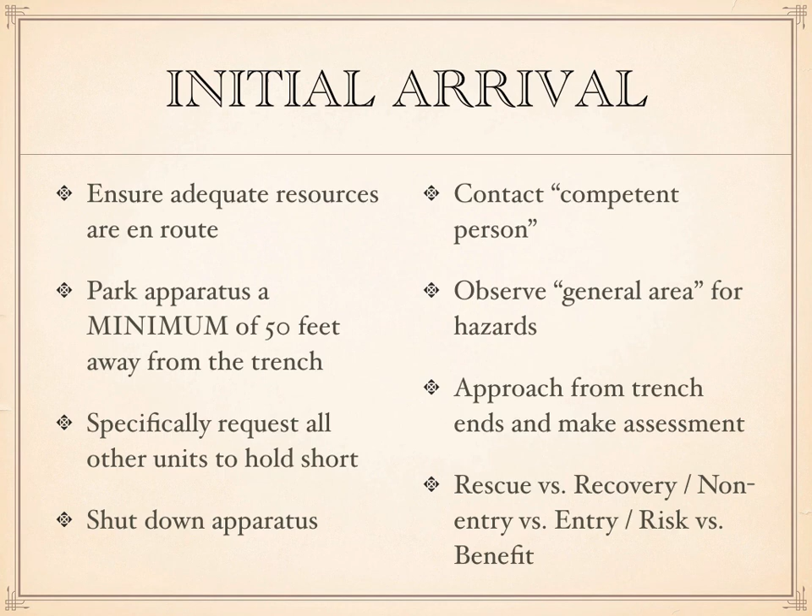Of course, you have to consider your hazards, potential for hazardous air. OSHA 1910.146 gives us your hazardous air parameters: oxygen enriched at 23.5, deficient at 19.5. Your alarms for LEL set at 10%. Alarms for CO at 35 parts per million. Hydrogen sulfide at 10 parts per million.

So get your hazmat people involved. Right away you have hazmat people involved. Don't be afraid. Please, hazmat 52, please come on up and perform air monitoring. Get them involved to eliminate and assess for that hazard.

Water is a natural hazard that's often present in the bottom of trenches, either due to a high water table, or utilities in the area, or environmental impact. It's been raining for days, which seems to happen miraculously as soon as we cut open a trench for training.

Of course, there may be actual utilities in the trench. That 811 number should get you some information on utilities if there's no competent person in the area. However, hopefully you have a competent person and they can readily identify those things. There may be utilities in the soil that you can't see, those subsurface encumbrances. So you need to get a good assessment of the entire area, including things you can't see, and that's where that 811 number comes in, or a competent person from the area.

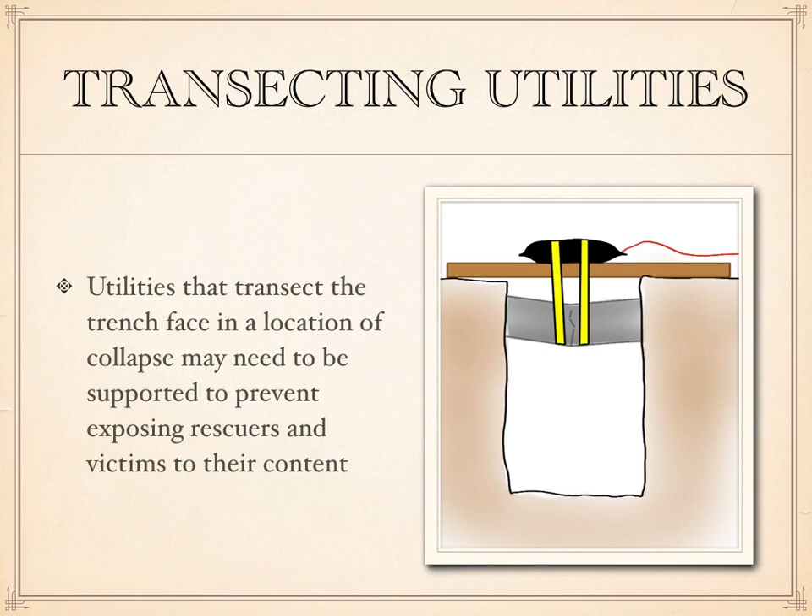That slide may be getting a little bit ahead of myself, but of course, anytime you support a utility, you need to consider if what you're doing truly will support the utility. If you're supporting a pipe, how heavy is it? What's involved? What do we have that'll support that amount of weight?

When you're talking hazards in a trench, well, trenches are confined spaces. All trenches are considered by OSHA to be confined spaces. However, a trench is an excavation and therefore is exempt from OSHA 1910.146 in most instances. There are instances where compliance to the confined space standard will be required. Of course, constant compliance to the standard offers the best safety and liability protection. However, that's highly impractical in most heavy rescue situations.

29 CFR subpart P is a construction industry standard, and its application to rescue personnel is at the discretion of your local OSHA officials. At most times, it's perfectly acceptable to perform a trench rescue without confined space equipment on. We don't need our SCBA on. We don't need supplied air, so long as there's no hazardous air condition present. If there is, then obviously that changes the game and we need to comply with the confined space standard. But trenches are confined spaces.

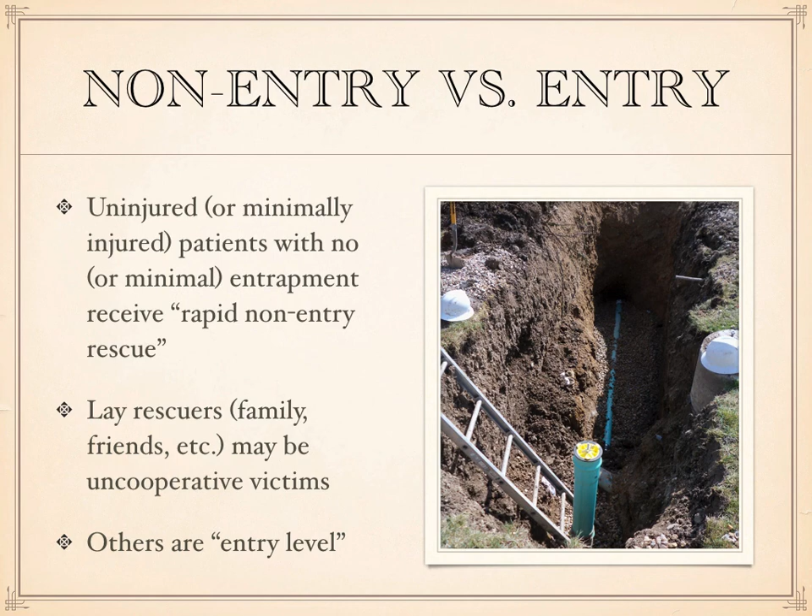So I mentioned it a little already, but that risk versus benefit analysis really determines so much in how you're going to operate. Are we willing to risk a lot to gain a lot?

Just to expound on it a little—I peer down in there as an RO and see someone pinned just above chest level, just below the neck. They're beginning to get cyanotic but moving his head a bit. I can see definite signs of life. This is one of those incidents where the risk versus benefit tells you, okay, we can risk a lot here to save a lot, and we'll move differently.

I'm not going to move step by step. I'm going to try to accomplish as many tasks at one time as possible and as quickly as possible. We might throw one set of panels in right at the patient's location, get a middle strut shot as quickly as possible, and be lowering a person into that trench box to begin digging, while the rest of the rescue operation proceeds behind that—continuing to build shoring boxes, continuing to progress things forward—but with that adjustment of moving quicker, getting directly to that patient faster.

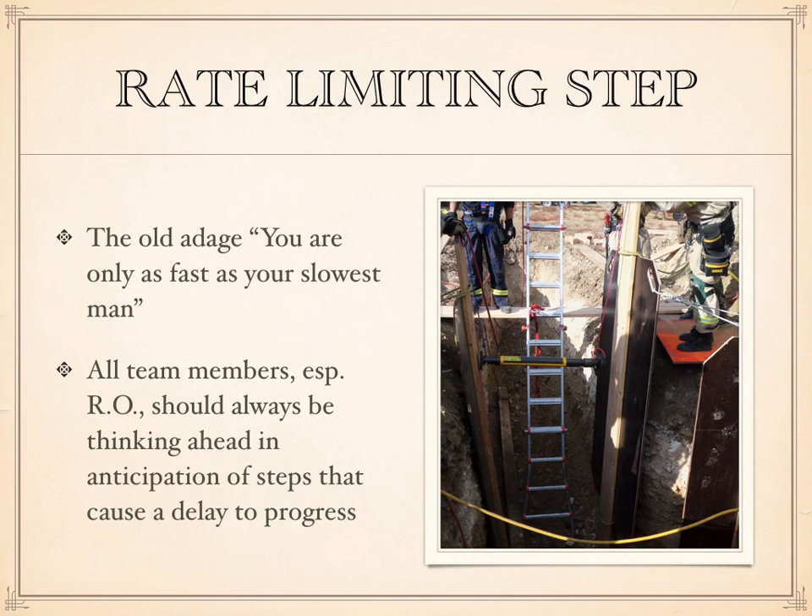It's no small order, no small task.

One of the things we're going to do very early on in the incident, in this initial arrival phase, is we're going to make the edge safe. We're going to do that by placing ground pads around the trench anywhere we anticipate rescuers are going to be working. You may need to level the soil around the trench, move spoil pile.

So we're going to take out these ground pads, and those ground pads are just going to be these 4x8 sheets of plywood, hopefully good thick stuff. It's going to go around the trench area, and you're going to overlap those boards by 6 inches.

Here you can see in the picture that the RO determined it was feasible and important to spray the areas where there's undercutting or soil missing from underneath the ground pads, to alert rescuers to the presence of a weak area.

These ground pads are going down for the purpose of distributing weight throughout the soil, so we're reducing the pinpoint area where we're applying weight to the soil surface. We can overcome that benefit by piling tons of rescuers onto single ground pads, so we strive to maintain a rule of 2 rescuers per ground pad during the operation.

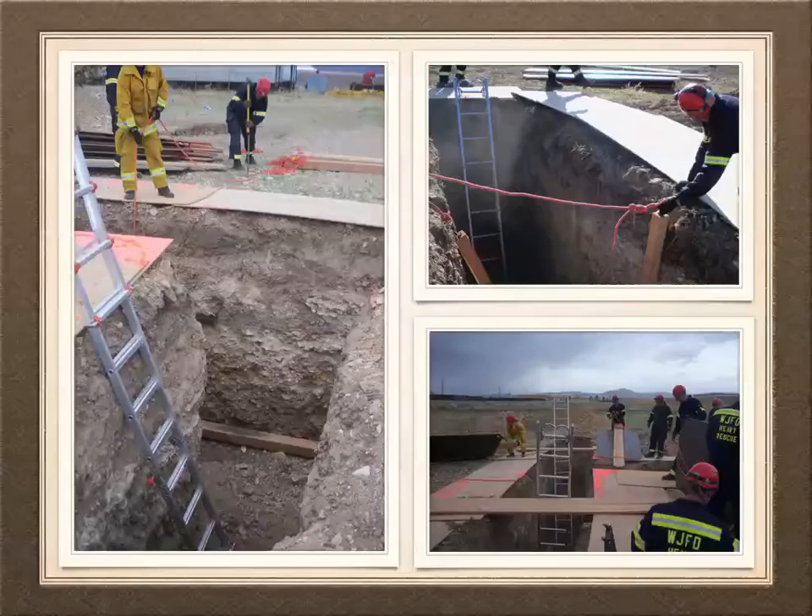When you place ladders into a trench, you can do so placing them along the trench wall, as you're looking at this picture here on the left. You can see they've just slid the ladder down and it's resting against the trench wall. Or, just like in the top picture at the top right, you can see they're at the trench end, a beautiful place for ladder placement. This is good early on ladder placement.

At bottom right, you see they've built a bridge. Go back to this other picture here, that's a beautiful bridge right there. But building these bridges isn't very feasible early on in the incident, unless you're doing a recovery, moving slow, or have a large amount of manpower - then sure, build these bridges right out of the chute. It makes it so that rescuers operating down in the trench can easily turn and scale the ladder if they need to.

The other form of placement, where it's resting against the trench wall itself, is a little bit more difficult when rescuers are down there. If they need to make a quick escape, you have to get to the ladder, turn, and then try to get up, making sure you didn't scurry and hit that ladder with enough momentum that it begins to fall into the trench.

So those bridges there, built in this case with 2x12 lumber, are very nice. But depending on your rescue mode, if this is a recovery and it's early in the incident and manpower is limited, don't let a rate limiting step develop by having somebody sit there and hammer in boards to make a bridge. It's not that essential.

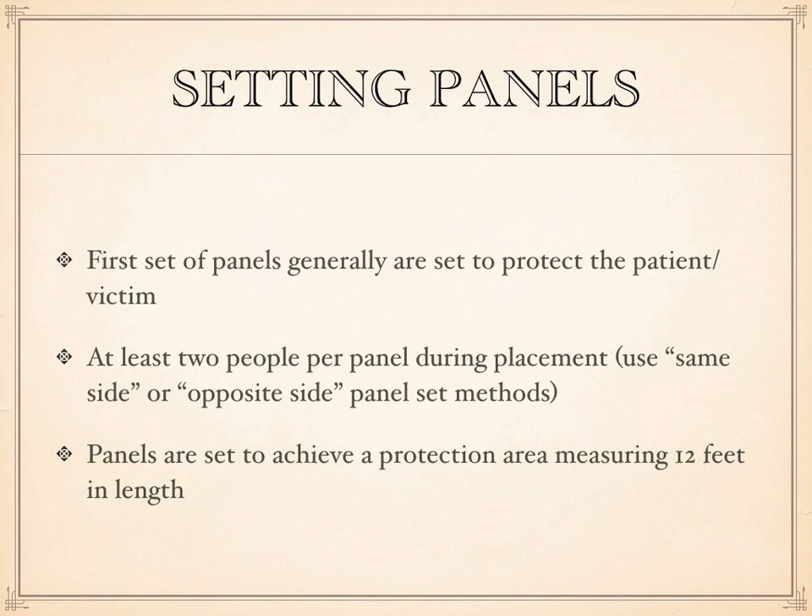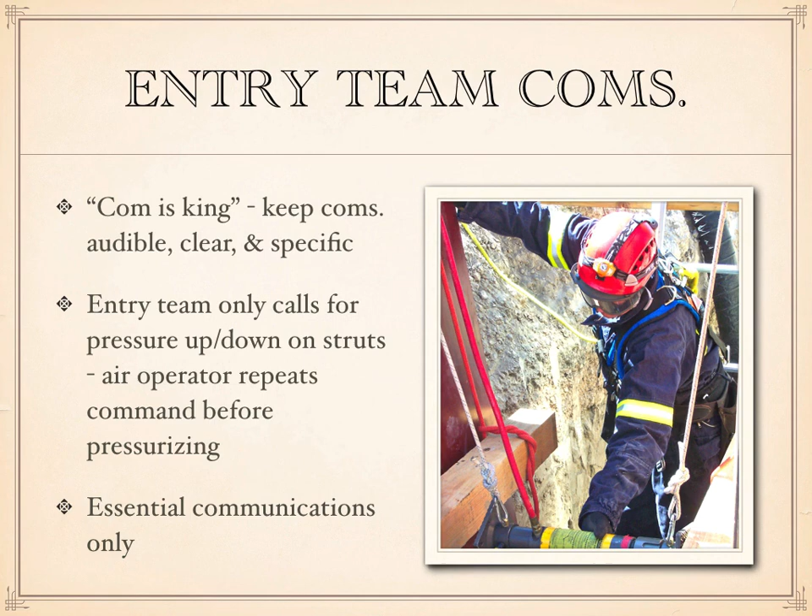So let's actually take a look at some of the methodology behind the trenches, both straights, T's, and L's.

Generally, in a straight trench, you'll have one rescuer working from one end and a second rescuer working from the other. If feasible, you could, in theory, have 2 rescuers working from each end. Depending on the situation, you may also choose to have rescuers enter a single end and work toward the patient.

If it's an immediate rescue, you may get your center panels in place, drop a middle strut, and lower a rescuer right in there, in which case, as the system comes in to be built behind him, he'll work outwards. Most likely, if you've done that, your rescuer there is paying just attention to getting soil off of the patient, and you have other rescuers building from the outside in.

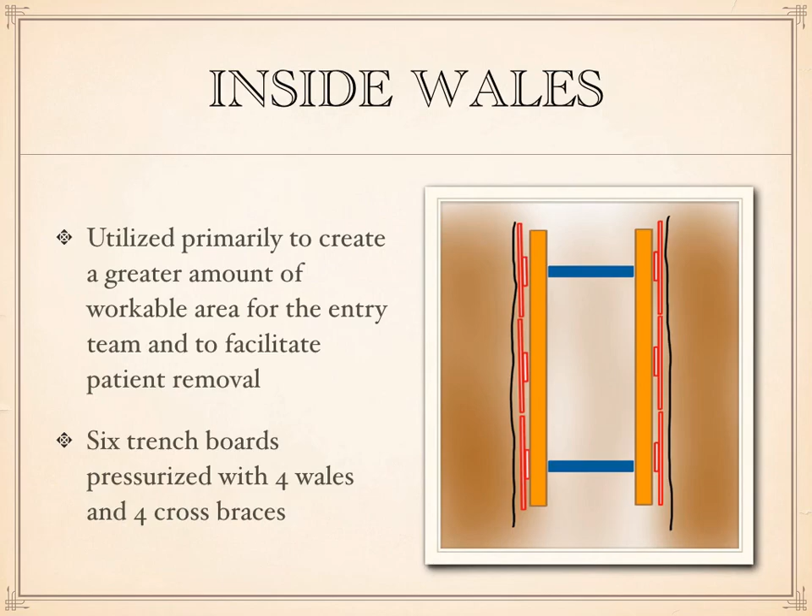One technique is using outside wales. Typically, this is done when you have a large section of the trench wall that has given away and collapsed, and you're looking at such a missing portion of the wall, you're not quite sure what you're going to do to fill that void space or create a system where you can apply pressure into the wall.

You can use these outside wales to kind of span that gap. Apply trench boards to the opposite side of the wales, and that's what your sheeting will push against, is the wales that span a distance and hopefully capture some of a stable wall.

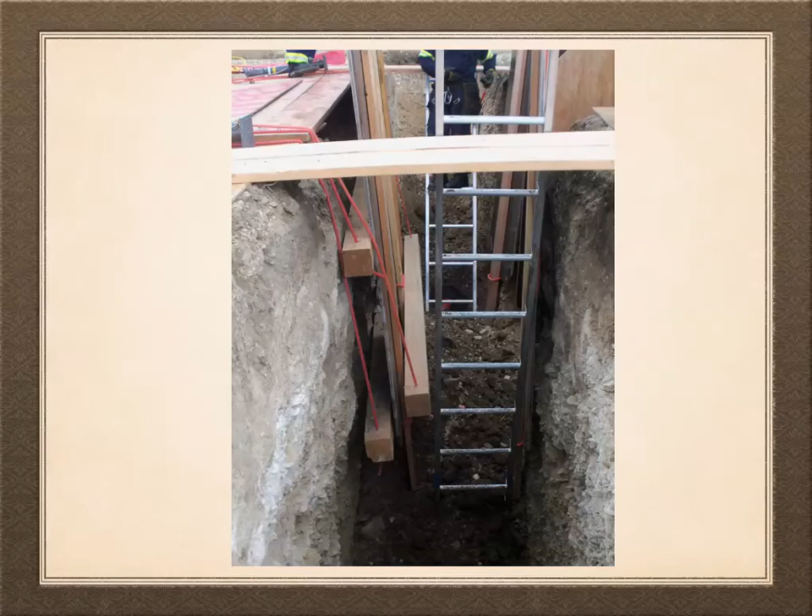Here's an example of outside wales being used in conjunction with an inside set of wales. This looks like it's a T trench, so he needs the inside wale there, and he's spanning that large gap where soil was missing using the outside wale technique.

You are going to have void spaces in trench. They don't all need to be filled, but any significant void space that threatens the integrity of the system does need to be filled. Anywhere where you have a large gap that's going to cause your boards to move and lose contact with the soil, as pressure is placed on them, can be filled with airbags of various natures.

High pressure airbags work sometimes. You need to support those. Connect all your airbags, everything you're using, to webbing, to rope, utility rope, so that you can control it and retrieve it if needed.

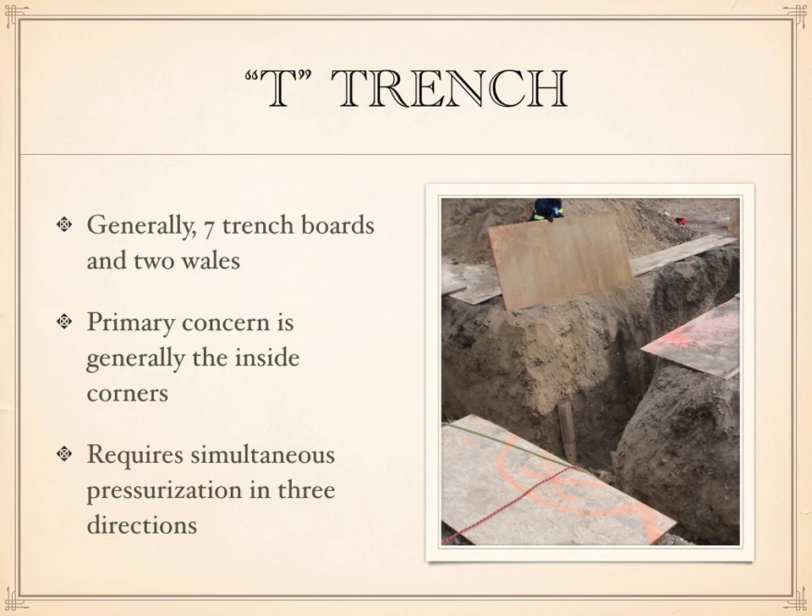Some pictures of a T-trench in progress. Again, please feel free to pause the video. Those of you who are familiar with trench rescue, you can look at it and help create some discussion as you look at these pictures. You can see various things going on.

So to give a really simplistic overview of a T-trench, the worst place for your victim or patient to be is right there in that middle top of the T, unprotected area.

So you need a way to be able to put a trench board there and apply pressure. And that's where that set of wales at the top of the T comes into place.

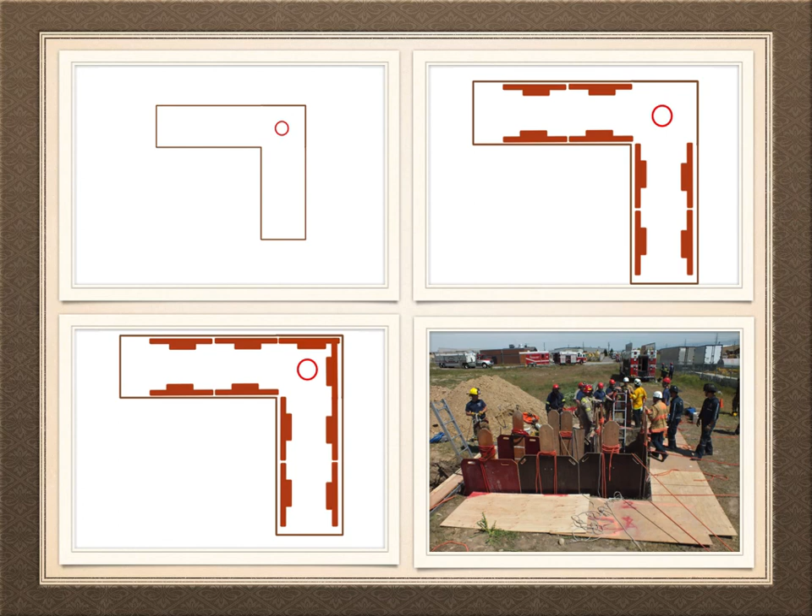Here's a simplistic view.

Very briefly, we'll talk about supplemental sheeting. Distal supplemental sheeting is required once you've been doing a rescue process that's required you to continue to dig down below the area of your sheeting.

The trench had a significant collapse. The soil material that came in filled your trench up to a certain degree. Your patient's buried, and you're really having to dig down to get to him. And you discover that you've actually had to dig down quite far.

According to OSHA, below your sheeting, you can have no more than 4 feet of exposed soil. So once you're 2 feet past the bottom of your strong back, that puts you at that marker where you're actually 4 feet below your sheeting. At that point, some supplemental sheeting does need to be applied.

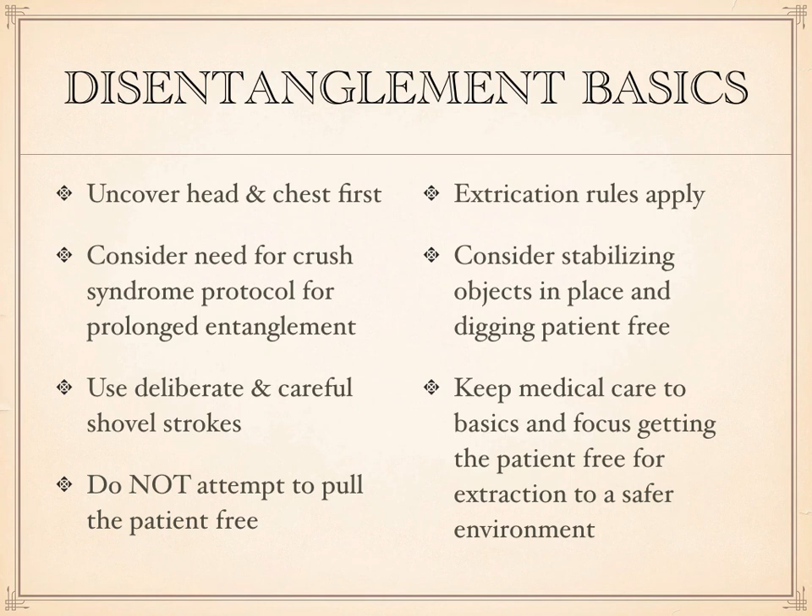Of course, it's all situation dependent. Use prudent judgment, as they say.

Don't forget your option of a vacuum truck. Hopefully you practiced with it during the pre-incident phase of trench rescue, and you're familiar with it, and the operators are familiar with it. If you haven't practiced with them, look into your local utilities groups and see who would come out. If you requested a vacuum truck through VECC, who's it going to be?

Or touch base with your local city groups. Our local department in West Jordan, they're fantastic. We've had them come out many times and work with us. They enjoy coming out. From everything I've experienced, these vacuum truck employees who run these things daily, you give them an opportunity to come and do something different, and they love to come out. They love to train. They're great guys. They know their equipment better than we ever will. So call them, see if they'll come out, tell them what you want to do, explain why, and most times they're more than happy to come, and they're learning, you're learning, and it's great.

And it's a great resource. You do need to know how to get a hold of it. Maybe you get a hold of a vacuum truck through VECC. Maybe you have a direct line to people you work with in your utilities departments that will answer the phone and can arrange that. A lot of times that might even be faster than seeking a vacuum truck through other methods.

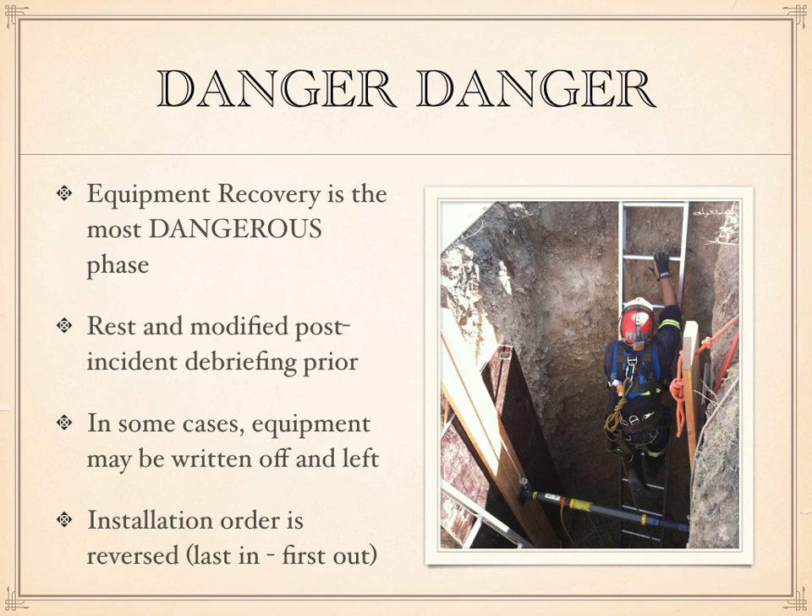Once our equipment is recovered, it's truly time to terminate the scene and get the command turned back over. Maybe it's a crime scene, OSHA may be there. With a true trench collapse involving bodies or a victim, OSHA will be on site, and you want them on site. You should not recover or remove anything from the trench until your OSHA officials have said you're good to do so. OSHA may have an investigation where they want your equipment left in place, so make sure you don't remove any equipment until it's deemed appropriate.

Again, rescuer health is big. More and more nowadays we've been noticing and paying more attention to rescuer health. Trench collapses often involve close contact or prolonged contact with a body or someone needing rescue, whether they survive or not. There's a need in any trench collapse situation to make sure your rescuers come out of that and receive the support and care they need to stay healthy and continue in their careers.

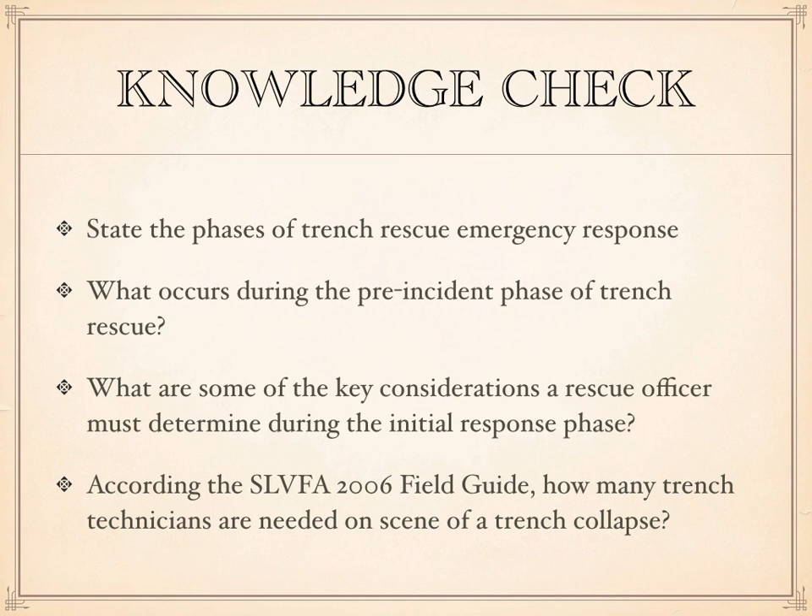And a handful more questions here for you.

Certainly I don't know everything there is to know about trench rescue. I have a ton to learn. It's a subject matter that I love. I've been involved with it heavily since 2006. I think in West Jordan we have an aggressive trench rescue program. I take a lot of pride in it. I do everything I can to make sure that every year we get several trenches to go out and practice in, and always try to push our skill level and make sure we're not getting too settled in just a mundane routine.

But I certainly have a ton to learn myself, so use this slideshow just as a means for prompting training and further discussion. Please go out and make sure you understand things. You can review the other videos on the YouTube channel and see what they offer. There are a lot of individual skills that give our guys in West Jordan a format, an easy thing to review, so they can hopefully stay sharp on their skills and be ready for testing when we test them.